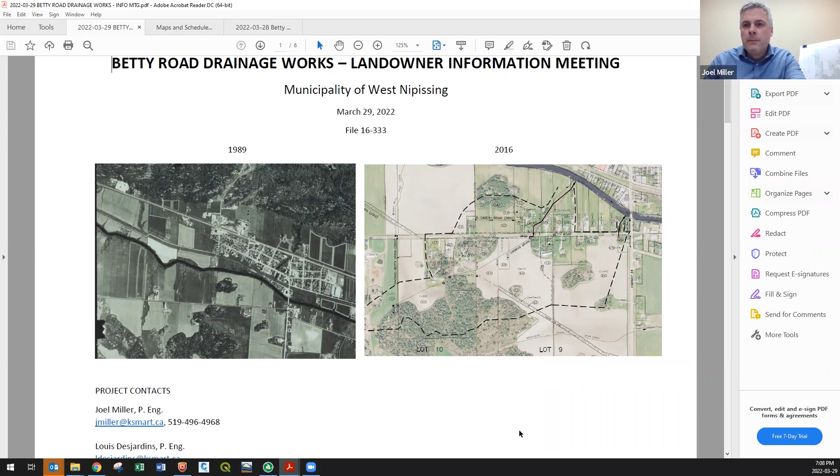On the first screen, and this is a very rudimentary presentation. With these projects and meetings like this, I think the most important thing is to convey information. And so I haven't gone out of my way to make this presentation super glitzy. So if you skipped out on the hockey game to see a glitzy presentation, I apologize, go watch the hockey game.

But in any case, this is kind of a neat comparison of an aerial photograph for Betty Road from 1989.

This, if perhaps you'll be able to see my little mouse hand moving along the route of the Gingras Drain. And there's not as many houses in 1989 as we have today. This is the map that was sent out with the notice for the meeting. So that's more just a point of curiosity. But again, I think it's indicative of a watershed that has experienced some change since some of the original municipal drains under the Drainage Act were installed.

So in any case, what we'll do with our time this evening, I'll, like I say, walk through some of the investigation and the findings that we are bringing to the meeting tonight. I'll be fielding questions if you have any as to the drain design or what our recommendations are. Then I'll walk through assessment calculations.

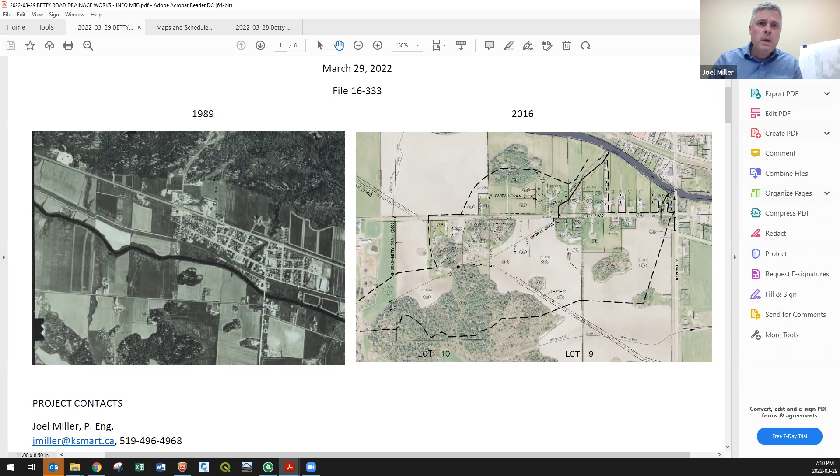And the other thing I'll mention at this stage of the game would be that I'm going to be in the neighborhood tomorrow, certainly for the first part of the day. So if you wish to meet with me on site to talk about the project, talk about what I'm recommending, or any of the items related to the project, you can either send me an email, and again, here's my contact information, jmiller@ksmart.ca, or that's my cell phone, and just send me a text or give me a call later tonight, and we'll set up a time to meet on site tomorrow.

I'll have some availability to do that, because I think it's important that people have the opportunity to talk about the project, because it's your own backyards, it's your lands, it's your pocketbooks, your wallets, and so I want to make sure everyone has a chance, considering the format we're in, to talk about the job with me on site. So that's available as well. So if you need any of the email addresses later in the meeting, just interrupt, and we'll go that route.

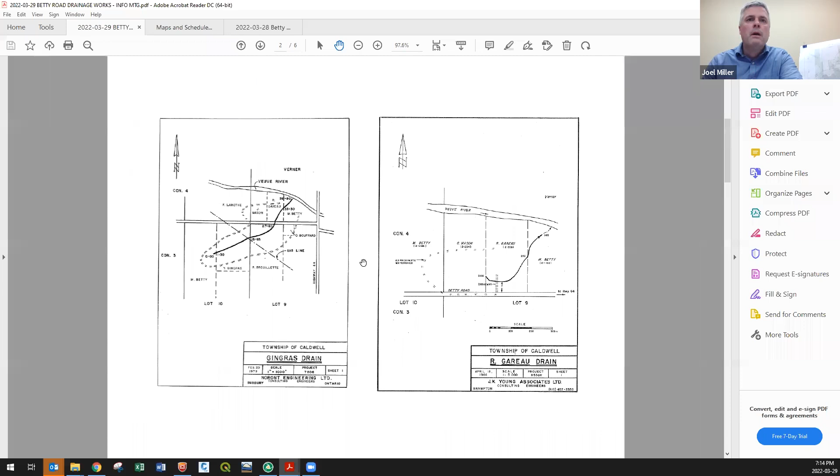So first step in any drainage project is to sort out where the watershed is. So we consulted all the different historic watershed drawings and maps. These are some of the drains that are further to the west. Again, this is the area of our focus. This was the 2002 extension of the R. Gareau drain upstream.

And what you'll see in the map that was sent out in your meeting notice and the map that is going to be in my report, this boundary, as I've shown it in black dashed lines here, represents our best understanding based on our field work, our survey, and contour lines, the actual area and the hectares that get into the two drains in question. So the Gingras drain, the R. Gareau drain, and this new drain, due to the Section 4 petition by the municipality, called the East Drain.

And that's as creative as I can get for a drain name. So if someone would like it named after them, you can send me an email later. But if you choose not to do that, I also understand.

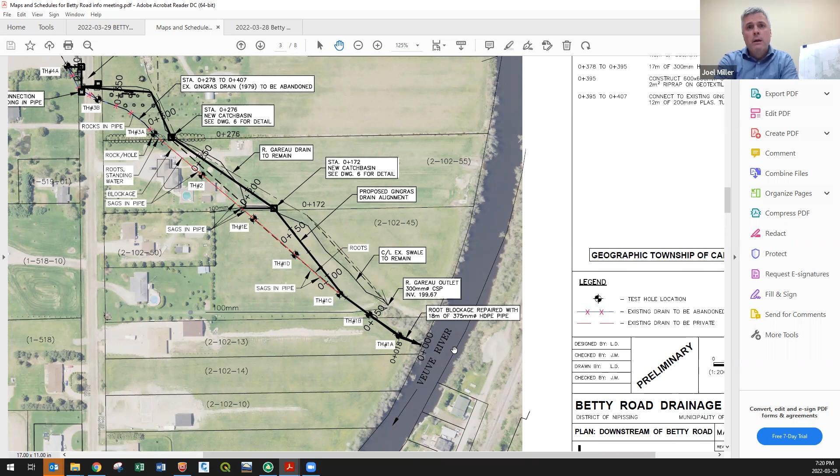And what was done at that time was to not just repair it with the same size pipe, but we went ahead and upsized it a couple of sizes in anticipation that the old pipe probably wouldn't be large enough to start with. So there's a section of 15-inch pipe installed to deal with that blockage a couple of years ago. So that did improve the throughput of the old drain, but it remains a drain that's old, that does have some other issues.

Under the road, we found all sorts of poor connections where different laterals and stubs were brought into the pipe under the road. And most importantly, the holes we dug and the camera work that was done helped us draw this on a map with some aerial photography in the background.

So we can say this is where the drain is, because we start this process with a sketch like this from 1979 with property lines that look like this. And that's kind of a bit of a blank slate. So in any case, that's downstream of the road. These were the test holes we did. Then based on some other feedback we had as far as concerns, drainage issues that were brought to our attention at the first meeting.

Someone's coughing. I hope you're going to be okay. Don't bother taking a test though. I think you're probably going to test negative. It seems like everyone I know is testing negative, even if they cough.

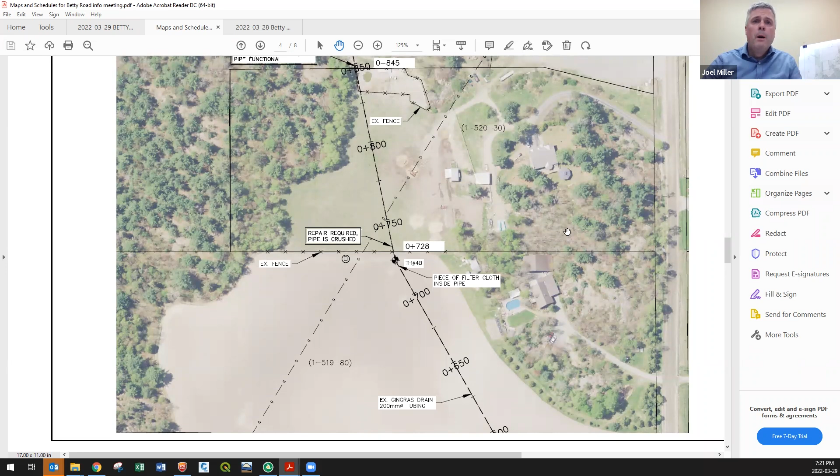But upstream of the road, like I say, it's an 8-inch pipe, and we did a number of test holes here at the Hillborn property, and then further up on this Kevin Sidock and Gingras. Don't know your partner's first name, I apologize. So in any case, we did a couple of test holes there to figure out where's the drain, what's going on, and a few issues that we're going to recommend get fixed. But the capacity of the pipe overall we found to be okay. So that was some of the investigation that we did, and I hope up till now everyone's still awake.

Let me quickly move to this map, because as part of our investigation and based on input we had from folks, there was considerable discussion about whether road ditching had ever been undertaken that transferred water across watershed boundaries. And we did a survey not just of the route of the drain, but also the south ditch of Betty Road and the north ditch of Betty Road, all the way to the top of the hill.

And so certainly the Sidock lane there at address 5603, that is a high point. That's a split point in the south ditch and the north ditch, where water either comes into the drains that we're working on or it goes the other way. And so we did some investigation along those lines.

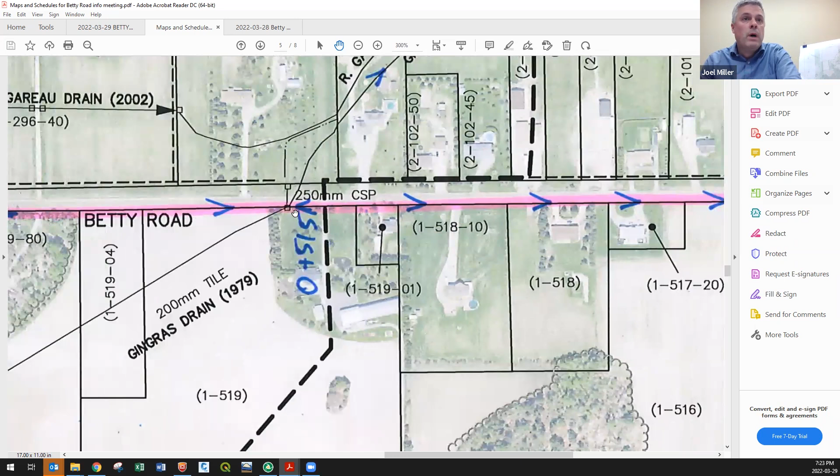And then we also reviewed Briette's laneway, and the survey we did in the south ditch here helped us to definitively say, based on existing conditions, this is where the boundary is. Water to the east of his laneway goes east, and to the west goes into the catch basin and then down the Gingras drain. So that was another piece of our investigation. These are some notes that I made along those lines.

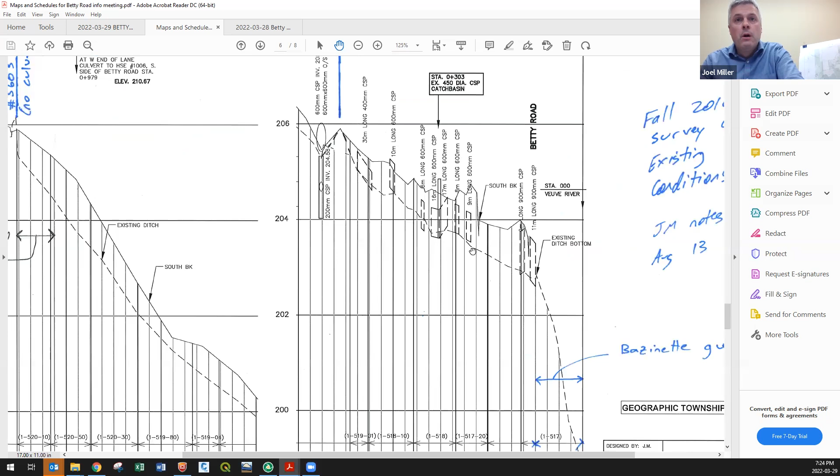And if there's further questions about those, I can talk about them in detail, but this would have been a profile we created of the ditch on the south side of the road. So 0+00 here, beginning at the river, and then we come up the gully to the road, and we proceed west, shooting lots of lane culverts, all of which have slightly different elevations, grades, and some sizings.

And then here at the peak is Briette's laneway, and just to the west of that is where it dips down, and we have the road culvert, and then further. And then we go from this profile to this one, and we continue west up the hill to Sidock's laneway, and that becomes the split point for the watershed boundary, with the water to the west going into a different drain. And if you had really good eyesight, you just saw the assessment schedules.

But we'll bring those up and discuss them in detail later. So one of the other questions that was asked of us in our work was, what should we do with this water? And I'm going to see if I have another drawing that I'd like to pull up. But before I do that, I guess I'll back up to this one.

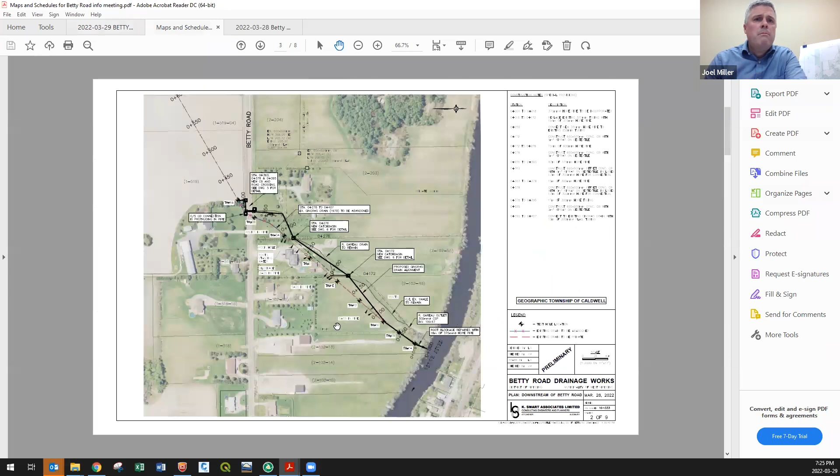So as I mentioned, the existing Gingras drain takes water, subsurface tile water, but then downstream of Betty Road, it also handles surface water. So we're dealing with two different pieces. We have subsurface tile water where you need a deep pipe and it runs a fair bit depending on soil moisture conditions and these kinds of things. But then a surface pipe that responds to spring melt and heavy rain events that wouldn't fit in a subsurface tile drain.

So we knew without question that the Gingras drain needed to be replaced in any case from the road down to the river. So then the question just becomes, what makes sense in terms of handling the surface flows, those larger volume events? Do we continue to have them run along the swales to the river? It's not going to be reasonable to upsize pipes to handle all the surface flow down to the river, or do we look into taking that water east? And that was a suggestion that was made by a number of folks, and we were asked to look into that.

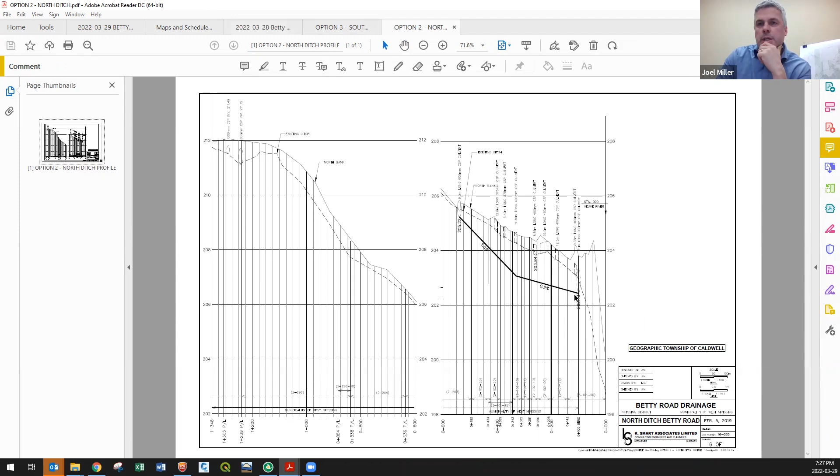So I have a couple of other drawings that I would like to share. So again, these are drawings that show from the Gingras drain crossing on Betty Road to the east over towards the gully. We looked into what kind of grade was available, what was the capacity of the culverts that were there, what would it take to run major surface flows to the east. Never mind whether it's a great idea, but let's just look at it from a cost standpoint. And if the numbers make sense cost-wise, then maybe we can solve some of the technical engineering tricks.

So that was the north ditch profile. This is the south ditch profile. So again, all kinds of fall going that way. But what we found was that every single one of these lane culverts would need to be replaced. Even some of the newer vintage ones wouldn't necessarily match the design grade that would be required. So you had adequate size for standard roadside culverts, but if we brought that surface water in the direction being considered, we weren't just handling the water that everybody's used to seeing. We'd be diverting that upper watershed a new direction in that south ditch or in that north ditch. So those culvert sizes that you see today wouldn't necessarily apply.

So we looked into the hydrology, the sizing that would be required. And then we did some preliminary costing. And what we found is shown on this drawing. And I'm hoping that you can at least see the colors, because I'm really proud of these colors. If we were to just run the surface flow, we still have to spend money to take the tile water north, unless we're going to put in a $435,000 storm drain that's deep enough for the tile water as well as the major surface flows.

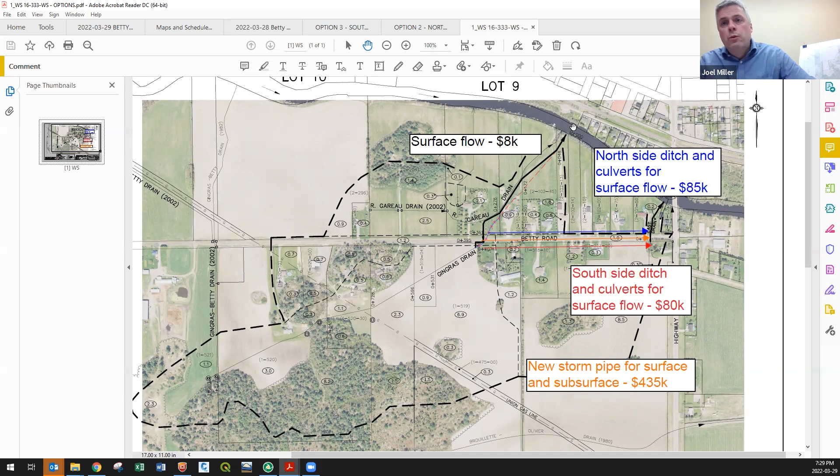And so you can see, again, when you see these numbers of 80 or 85, and even 8,000, you got to remember these don't include the cost that's involved to deal with the tile water, the historic Gingras drain flows that are coming and will keep coming in this direction. And so the overall cost of the work is higher than the numbers you see here. But this was an exercise we went through just to compare the relative cost between options to deal with surface flow, major event flow.

Okay, so if there are questions about that later, I can talk about them, but again, that was based on the survey, the calculations we did. And so it's quite obvious that we needed to continue looking, in terms of our recommendations, at just providing improved conveyance downstream of the road, so there's less surface water that's problematic for the landowners in this part of the watershed.

So I will, I think before I get into our recommended work, I'm going to pause. So next I'm going to talk about what we propose and what we want to do. But before I do that, up till now, I've kind of just been talking about what we found, our existing condition findings, and drainage patterns in the watershed, these kinds of things. Are there any questions for the folks that are on the Zoom call that are burning that you'd like to ask right now?

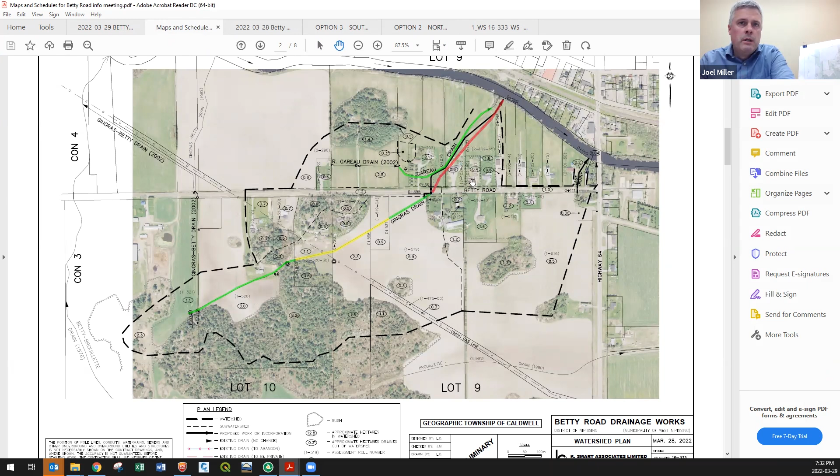So I'm going to now bring up our drawing set and try to walk through what we propose for the work. I've talked fairly extensively about the Gingras drain and this watershed and the watershed splits, but it would also involve the proposed work for addressing the gully stability issue at the east end of the road and the catchment that drains to what we were calling the east drain. So I'll now go into a bit of discussion on what our recommendations are. So if I can now get to our drawing set, this is the map you've all seen.

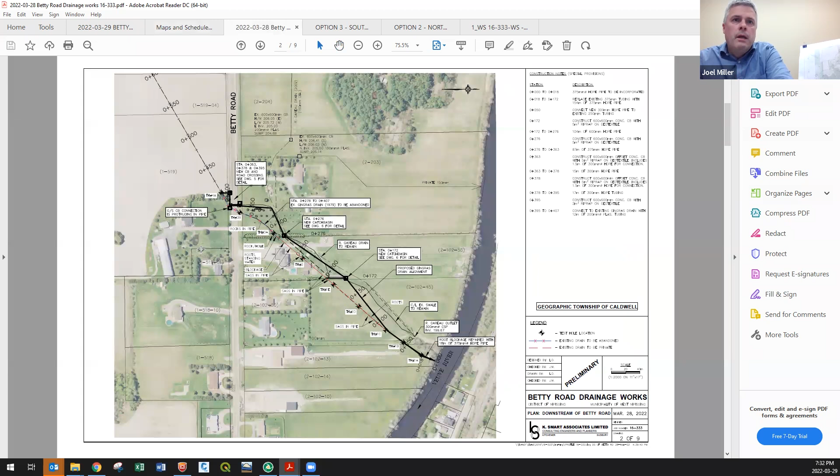What we recommend, I hope no one's getting motion sickness, is that the existing pipe from the road, from Briette's lawn, where it cuts diagonally between the pine trees, under the road, diagonally across Renee's yard, and then Peter's, Joey's, and Andre's, yes. Thank you for that. I apologize, a lot of names here. We are recommending that pipe go from being a 10-inch piece of bag tubing to 12-inch or 300 millimeter diameter smooth wall pipe. So that may seem like not a huge change. We're going from a 10-inch pipe to a 12-inch pipe.

The reality is a couple of things. First of all, the 12-inch pipe does bring the drainage standard for this drain up to current practice. So that puts the whole drain into the green. Okay, so that's the first thing. The other comment I'll make is that the capacity of a 10-inch tubing versus this 12-inch smooth wall pipe, the 12-inch actually gives you over 2 times more capacity than the existing pipe. So we're more than doubling the capacity downstream of just the Gingras drain. We're bringing it up to current standards, and in doing so, we're more than doubling its capacity. So that's encouraging. I think that's significant.

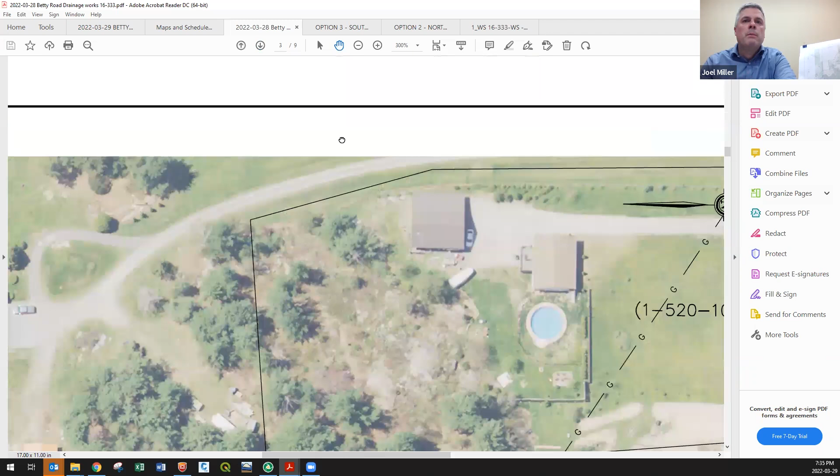So here's a picture of the connection we'll make at Briette's Field to the existing tile. We'll abandon the portion that runs diagonally through the lawn and the trees due to root concerns over time. Square it off, have a catch basin here to take south ditch flow coming from the west, have another catch basin again in the low ground to replace the existing catch basin.

And then going under the road and then downstream of the road, we're going to follow a path that is considerably closer to the low run, the swale that's on Renee's yard there. And then this section of the pipe will be abandoned. So it won't have any more status under the Drainage Act. And the idea here too would be that we're consolidating the location of the drain.

So we already have the R. Gareau drain coming from the west, where my hand is. We have the overflow swale from the road culvert. So the road culvert will be replaced here as well. And then we'll have new catch basins on each side. So the overflow swale, along with the drain pipes, are now all in a tighter corridor as opposed to kind of being spread out. At the time a lot of these drains were built, it was 100% farmland.

So it made sense to go in a straight line or maybe not take the path that we're recommending. But at this stage in the history of the watershed, it's best if we can bring these drain corridors as tight as we can, just to improve usability of the property for the landowners. So as we get to the property line with Renee and Peter, we set a catch basin here, and then we continue to cross with the 300 pipe, another catch basin with the property line with Joey and Peter here.

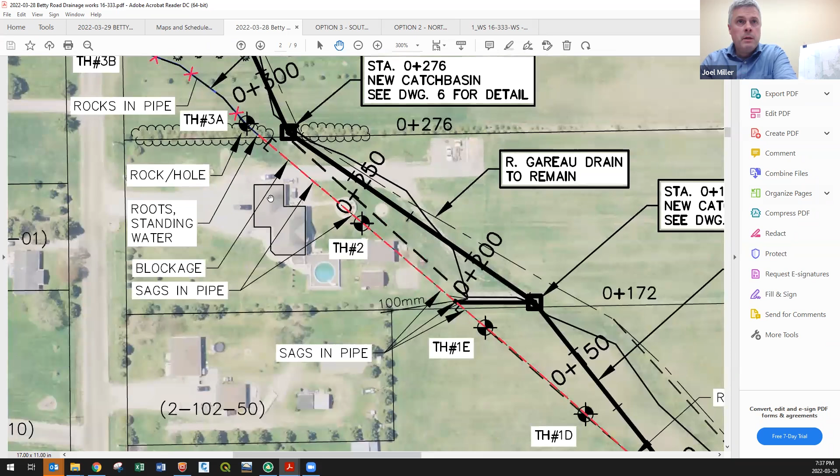And then here again is a significant revision in the alignment really across all three properties, but bringing the new 12-inch pipe much closer to the existing swale and the existing R. Gareau drain. So we're not sort of monopolizing such a wide footprint of this private land using it for drainage. We're creating a tighter drain corridor to improve usability of the land, and it doesn't change the design or add cost to the project to do so.

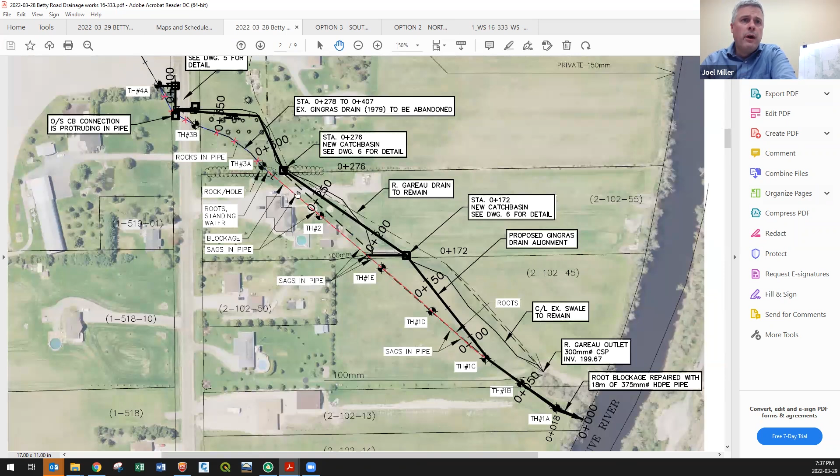And then near the downstream end of Joy's property and across to Andre's, we'll follow the existing drain alignment, and that's what's shown here. So that is the proposed pipe drain downstream of the road. Catch basins, a new 12-inch pipe. We hook in. So the old drain that's there will remain in place. Landowners have asked for that. I'll be speaking with Renee over the coming days to find out what his wishes are on this one.

And Sean, you and I will have a detailed conversation as to what we do with this older pipe under the road. My hunch is it should probably come out since we'll be digging up the road anyway, or it'll be blocked. And then I've spoken with Peter, and this drain will become private. It'll be his to look after in the future for maintenance, this older pipe, but he wishes for it to remain there. It'll be tied in at the property lines.

And the other thing we'll be doing is an interconnection between the R. Gareau drain and the new 12-inch. And the new 12-inch is going to be deeper than the R. Gareau drain. So it will be the preferred location for flow. However, if there's ever an event where one of the two pipes has extra capacity, then they both can work in concert once we've provided an interconnection here.

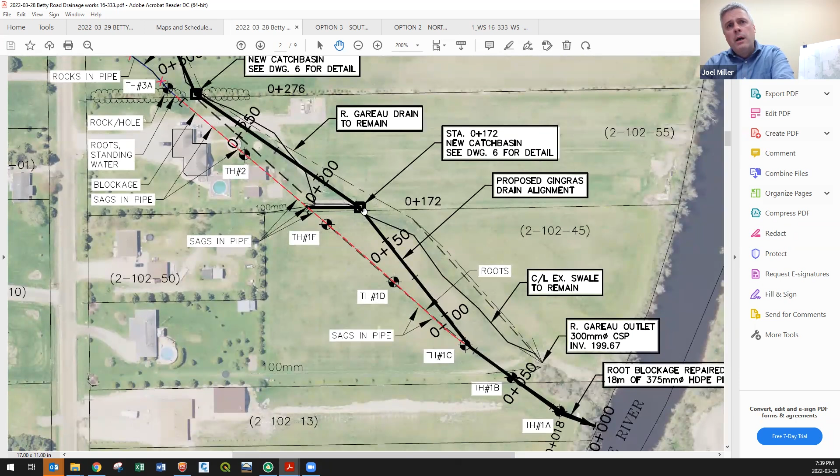And that won't have any adverse upstream effect, because if both are full, then the surface spillover location will remain this path along the drain across Peter's lawn. That's what he and I discussed. And then the same story applies at this property line. We'll tie in the old drain, and if the pipes are at full capacity, if we're experiencing a significant rain event, then there would be an opportunity for the excess water to boil out of the catch basin and take the valley, the swale, on downstream.

What would be that event? So John Lindley is here with me in our Sudbury office, and his question related to the design storm.

So what we've found in our modeling was that the 12-inch pipe, and I'm gonna need to, thanks a lot, John, asking me a question that I don't have at the tip of my tongue. Yeah, you better apologize.

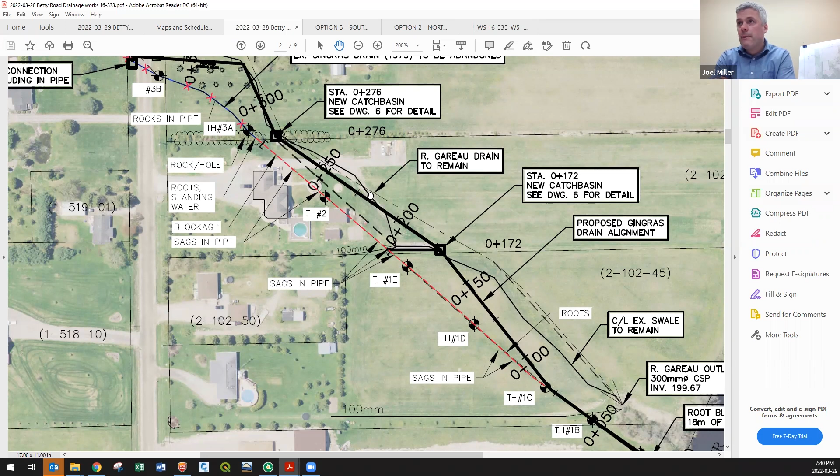So what we're finding with just the 300 is roughly the 2-year event can be handled in the pipe, and anything above that would go overland if it's a textbook design storm, synthetic design storm. But I think it's significant to revisit the fact that the old 10-inch has been working well for the last couple of years, and hasn't even come close to overflowing. And we'll put in a pipe with an interconnection that's more than twice the capacity of what's there. So that's the recommendation as far as sizing is concerned.

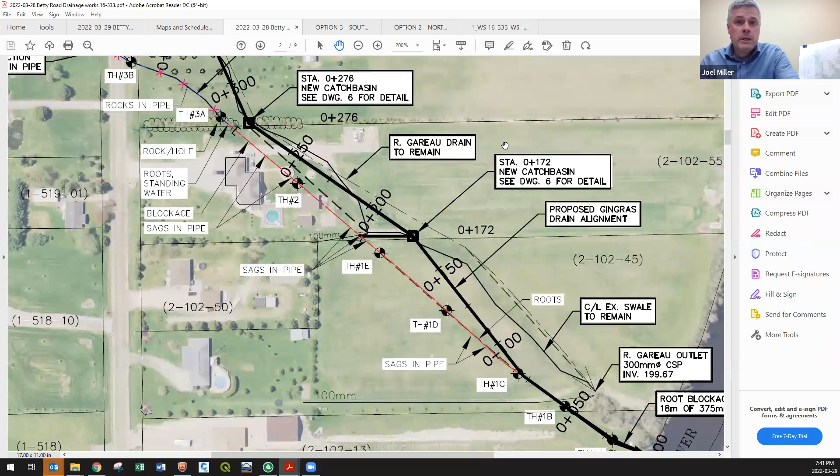So will there be surface water during extreme events? Yes, and that remains the case unless folks have money to spend and want to spend it on pipes. Then that's what my recommendation is. It certainly is a massive improvement over the current situation, and it brings it into current standard drain design.

So that's probably enough excitement downstream of the road. I will then just hop to this next drawing. That'll be part of the drawing set that just illustrates a couple of point repairs that we recommend doing based on our camera work when we did our test holes.

We did find that there were some issues with the existing drain near the fence line here. There's a blind inlet to the south, sort of a Werner style catch basin with a bunch of rocks, soak away hole with a tile connection to the drain in this area. So we found a few items in the pipe that slow it down. So just a short amount of pipe replacement is going to be needed to bring that back to its full

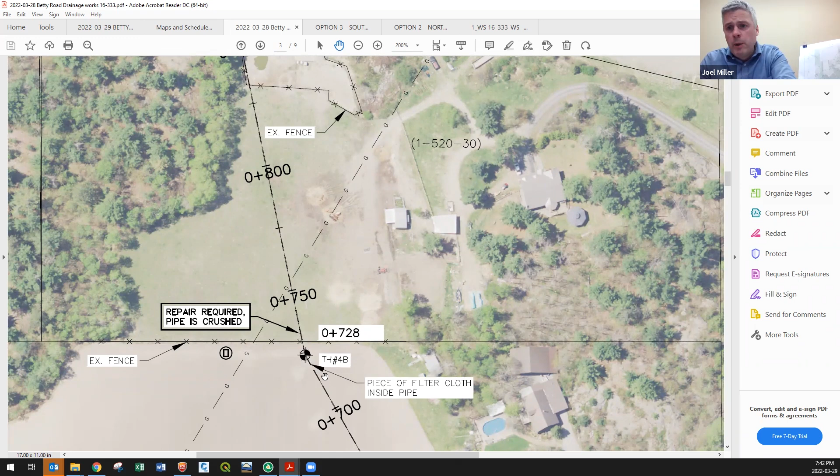function. As well as some rocks and some issues with the pipe right around here. So just local amounts of point repairs there, not wholesale pipe replacement. So that work is part of the proposed project as well, and that's in some ways sort of maintenance type work, just to bring that up to function.

And then again, this is the road crossing on the Gingras drain. So catch basins on both sides, offset to help reduce issues with freezing during the winter. And Sean, you and I can fine tune some of those details as we need to before we finalize the design. Drawing wise, it won't affect costs necessarily.

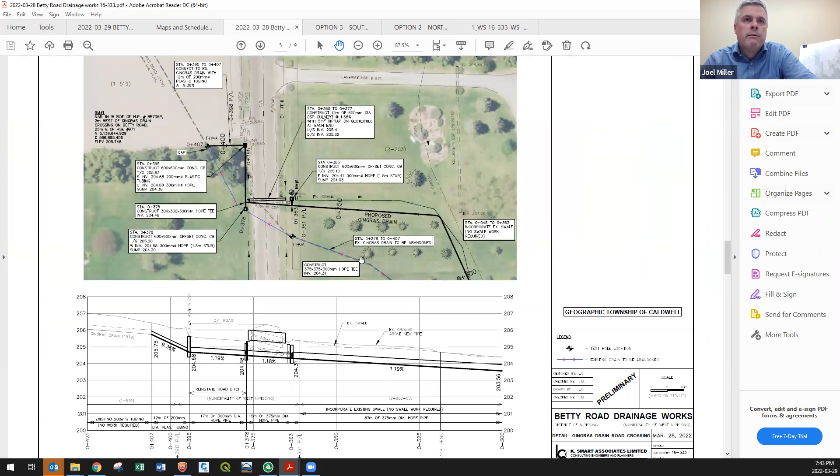And then replace the road culvert pipe while we have the road dug up. It's pretty old vintage pipe. It's crushed on one end. Still works, but it ought to be replaced while we've dug a big hole here. Okay, so that's recommended work on the Gingras drain. I'm just going to open it up for questions on that before I move on to talk about what we recommend for the east drain. So any questions?

Hello? Yes. I was just wondering, before, the west drain, which is the Gingras drain, okay, that took all of the land and all of the issues that were in or on Betty Road, but now that drain is compromised at all on the north side. What changed for the drain not to be able to take what goes downstream to the west on Betty Road?

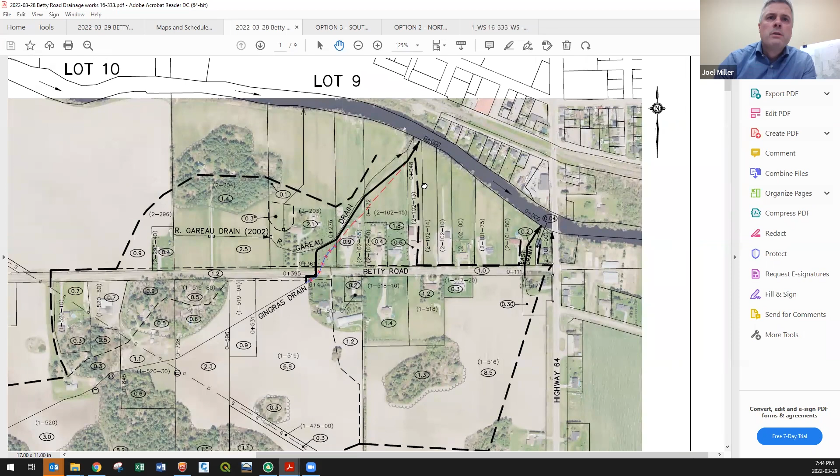Okay, yeah, that's a good question, and I'm not 100% sure who's asking it. Can I ask who was posing that question? Yes, it was Brad Master. Brad. Okay. Hi, Brad. I don't know that we've met yet. It's nice to meet you. No, that's a good question. So

What brought some of the drainage concerns to the fore at the beginning of this project, quite obviously, was a significant root blockage down near the outlet of this tile, and that's been repaired. So that was a considerable source of some of the aggravation and flooding issues and slow drainage that were observed a few years ago. Okay.

So that was just sort of a natural issue, if you will, right? Pipes need maintenance. We have a drain that's 45 years old, plus or minus. So that was one of the things. So then the other question you asked is whether or not there have been other recent changes downstream of Betty Road that have compromised the pipe that's there. And based on what we cameraed, I'd say the answer is no.

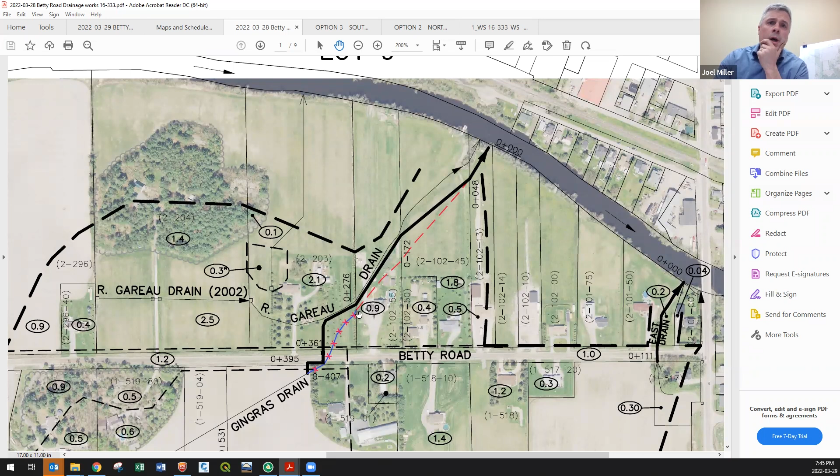We saw some sags in the pipe, which is not an uncommon thing related to construction. Sometimes grade isn't perfect. So we saw some sags in the pipe. There was some monkey business going on here at the property line, and I'm not 100% sure. There was some filter cloth. We thought for a while it might have been a dead animal. So there was a partial obstruction here as well at the property line.

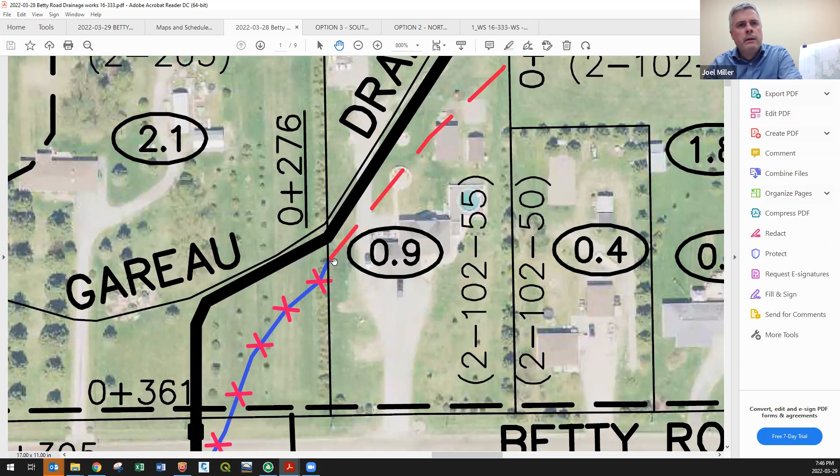In terms of conveyance, the main issue, and then there are issues under the road with the existing tile that we saw in the camera footage. So from a conveyance standpoint, those were concerns we've had. And then there were, like I say, some of the anomalies in terms of sags in the grade, little bellies in the pipe, and that sort of thing.

And then the other item that required some attention, and it has been rectified. I don't know if it happened before we started our work or around the time we started our investigation or during it, but Peter's laneway that was constructed here had a couple of different elevation levels based on the phasing of construction. And we have surveyed that, and in its current state, it's paved at the moment. In its current elevation, it is as flat across his laneway as the elevation of the swale and the overflow route at the property line.

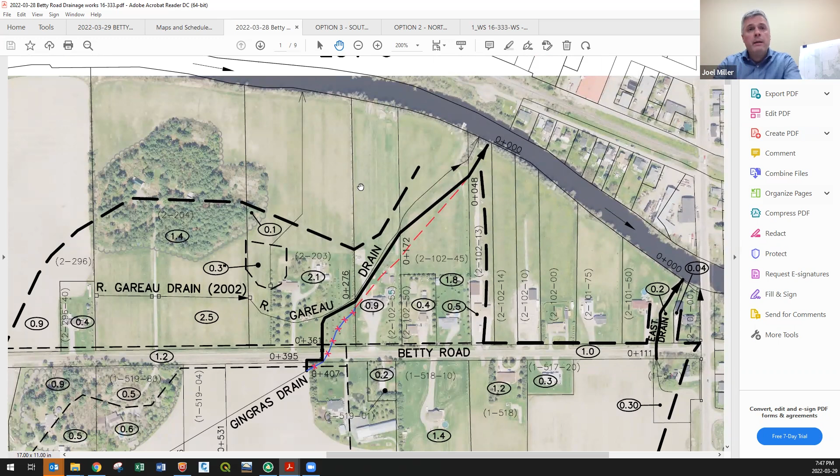So there were, at one point in time, some questions as to the flow capacity. I think it may have been a couple of things going on at once. You had blockages in the old pipe, and then you also had some phasing in terms of construction here that has been brought to completion with a driveway elevation now that's lower than the swale elevation. So Brad, I don't know if I've 100% answered your question, but that's my understanding.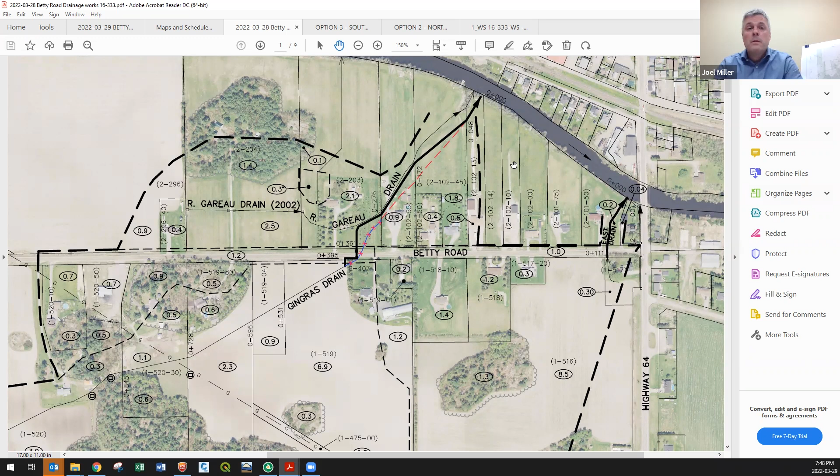If I can, if the road drain was functioning before, and now because it's not functioning as well, or there are issues, then does that not divert water down Betty Road to the other drain? Yeah, that's a good question. And so the answer is no, it doesn't. So when the Gingras drain was not working, none of the troublesome water went to the east, because this is a high point. And that was something we illustrated here on our profile, okay?

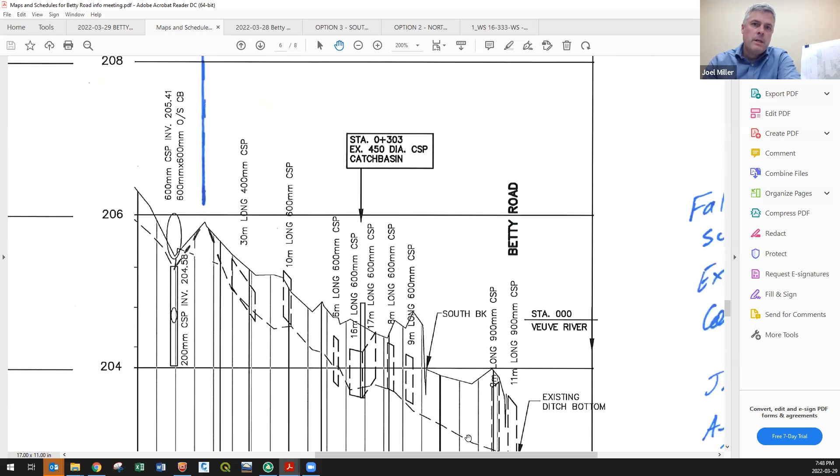So on this profile, this is the road culvert. And unless Briette's laneway ever overtopped, and my understanding is that it never did, water never went east over the hump of his laneway with no culvert into the south ditch further towards your land, which is these two culverts here. You have a pair of 24-inch pipes. So these would be yours right here, Brad. So there was no time when the drain function was substandard where water came to the east. Does that answer your question?

Yes, I guess, but just the properties, including mine next door, last summer they came in and did extensive repairs to my neighbors, and they did the repairs, I guess, before I even moved in, before 2019, to my property, and all of this was done without, if I understand correctly, a plan, an altered existing drain plan. Is that correct?

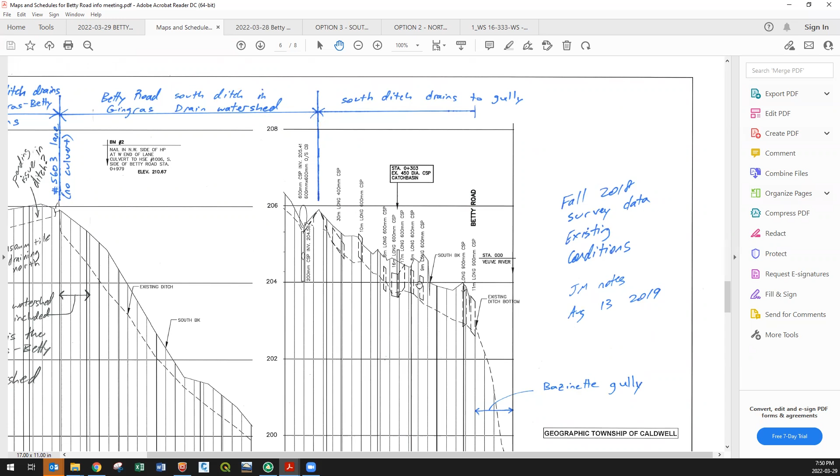It sounds to me like your culverts were installed or replaced and other culverts were installed or replaced as would be the normal custom for lane culverts along a road. They doubled in size or tripled in size on our side of the road, on the south side versus the north side. Almost all the culverts or drainage issue for the land is level or very little ditching done in front of those.

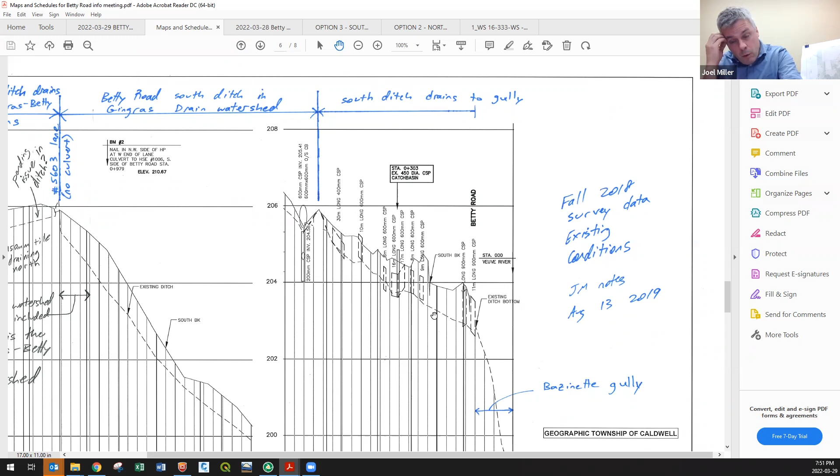Okay, yeah, I'm not 100% familiar with that. I was chatting with Joey. He filled me in on a few of the lane culverts that have been replaced. I believe last summer there were a couple that were replaced, one of the long ones that has a catch basin here. So it would not have been a requirement for any of these lane culvert replacements to adhere to my drainage scheme or the Gingras drain runoff demand, because historically the Gingras drain all crossed the road over at Briette's property through the road culvert.

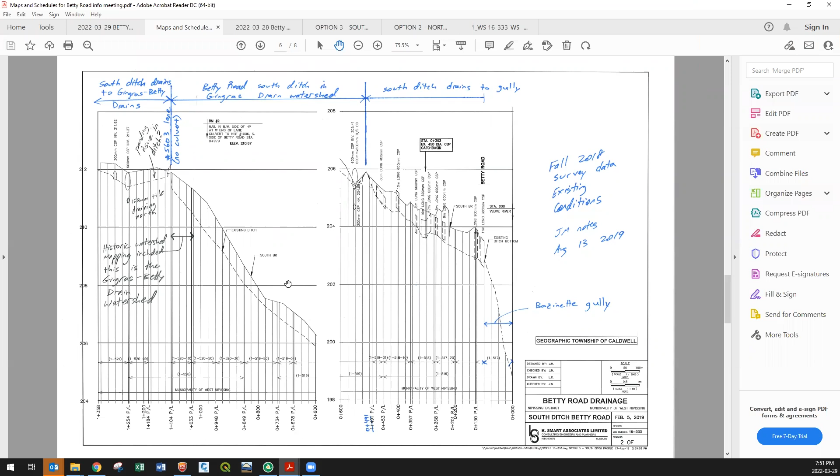Yes. But I guess all I'm saying is that now because that drain isn't working as well, the water's diverted to the east more so than it ever was before. And that was the reason that they had to put in 24-inch drains in front of my house in order to take the additional water flow, which wasn't an issue before.

Well, I have not been informed that there's ever been an overtopping of the watershed break right here at this laneway, where water ponded to such a depth in this yard that it then overtopped and went cruising to the east. So the sizes that were chosen for those culverts would have been outside of our analysis as it relates to conveyance of drainage from the upstream Gingras drain watershed, for sure. I think you're asking a good question, but that's my understanding.

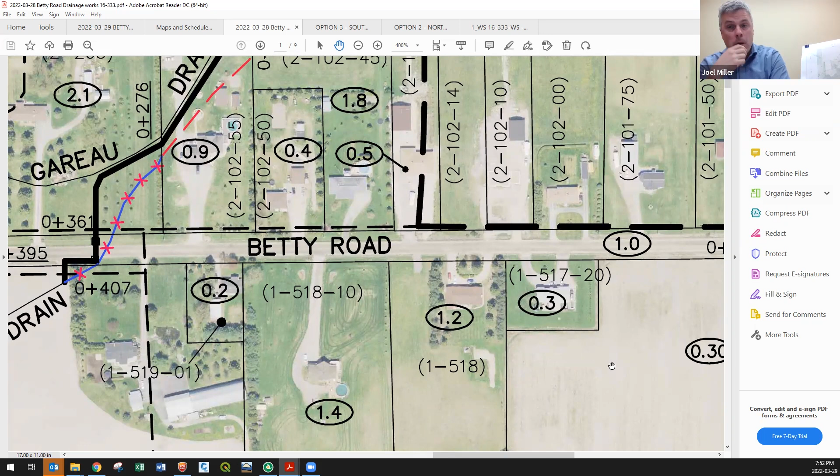So if things were changed, then there's a significant cost that's going to be downloaded to the north or south side of Betty Road.

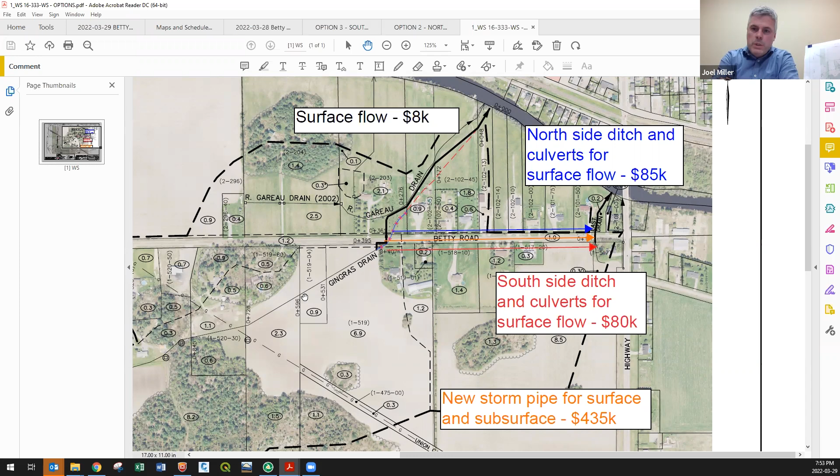Absolutely. And you're 100% right. And that's why our recommendation is not to do that. That's why when I put this options map up here, I was looking at surface flow, because there were folks asking the question, should we run the water to the east? So we looked at it, we surveyed the culverts, we said, what theoretical culvert size are we going to need to meet a minimum standard for lane culverts to take that upper watershed, which is these lands here, and instead of taking the natural path historically, we drag it east.

Our analysis was that's not a good idea. It's not the way it's been done. It's not the way any of the watersheds historically drew the boundary. Historically, and even going back to 1979, I don't agree 100% with this line here, but the point is that historically the path for this upper Gingras drain watershed was always to cross the road at Briette's and go to the river.

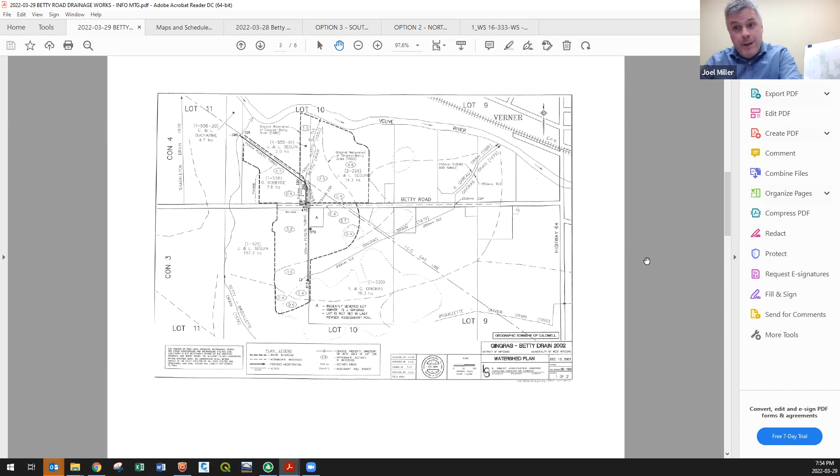So definitely, I agree with you. There would be cost offloaded to the folks. You'd have larger culverts, you'd have more flow, and you'd be participating more in the cost for the Gingras drain if we brought the water that way. So it didn't make any sense from a dollars and cents standpoint. So we're not recommending that.

So the reason that these lands are in, and I apologize if I'm hopping around too much here, the reason these lands are highlighted orange. One of the things I'm going to explain here is that I have a major outer catchment boundary, and that's this bold dashed line. And then we have little subcatchments within the big catchment where some water goes one way, some goes another way. And we split the drain into sections, and certain sections of the drain serve particular subcatchments.

And so in any case, we have a subcatchment line that crosses Betty Road at Briette's Lane. And based on our survey, based on my understanding, based on the design we're doing for capacity and calculations and flow, this is a boundary that we recommend keeping as is. The status quo should be maintained. No lane culvert here. Water goes in two different directions at that point. It's a split point. So thanks for that.

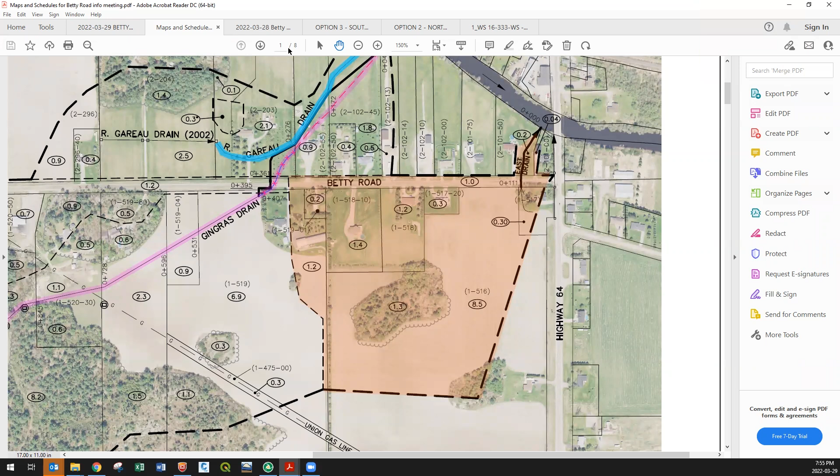Wasn't the attempt to fix this issue digging the south drains out more in front of my house in Bouffard's, and so that cost was done, because I guess what I'm trying to understand is how is that cost okay then, and the municipality covers it, but now we're going to have to cover the cost of redoing a great portion of it.

Yeah, no, that's a good question. So maybe Sean, if you're on the call, if you're familiar with some of the road ditching that was done in here. My guess would be the road ditching was done to improve the function of the road ditch just for the existing catchment that it serves. So that's kind of standard road ditch maintenance work. Maybe people were concerned that the ditch needed a clean out or needed some additional capacity. And so for this existing catchment, the municipality has always been under the understanding that these historic watershed divides are important and are good to maintain. And so I believe that would have just been standard road ditching work.

Yeah, you're absolutely correct, Joel. The work on Betty Road. So we have our capital planning. We always enhance drainage, change culverts, give the road time to settle that year, and then we do granular resurfacing the subsequent year. So that's exactly what happened on Betty Road.

Okay. If I may comment on the sizing of the entrance culverts. I do believe there were bigger culverts flowing into smaller culverts. I'm going back a few years, so I'm going off memory, but there were some capacity issues where the ditches in the spring were at capacity. So some of the culverts were installed at a little bit larger diameter.

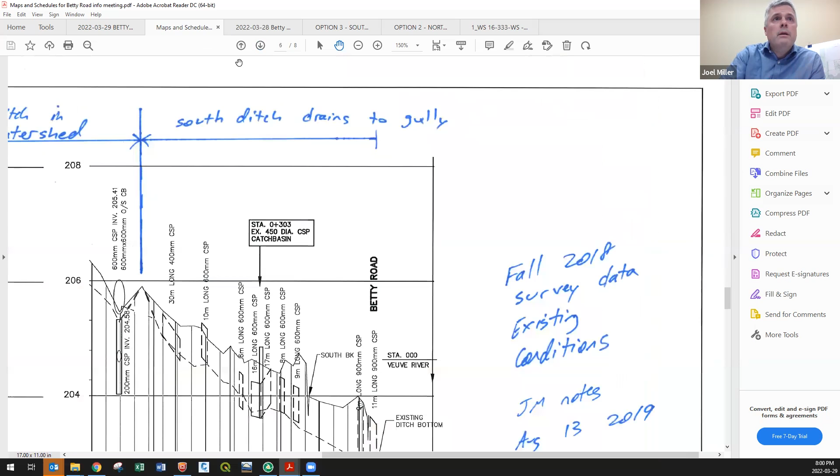But as we took a closer look, and I'm going to get to the proper drawing here, at the gully and the slope stability issues that we found there, what we are recommending for the gully, it takes water from that orange catchment, which adds up to, I believe, around 13 hectares, something like that. Sorry, can I interrupt, Joel? Oh yeah, for sure. Sorry, Brad. Yes.

The issue with the east end of the road, because nobody said it yet, is that there actually was no municipal drain there. Oh, right. So what Joel was trying to say is that the water in that catchment area was always there. The digging of the ditch on the south side didn't increase the amount of water, but it made it go faster. And then it crossed under the road into what you're seeing there as the east drain, which was actually private property. Right. And now we come to the picture that Joel wants to show you about how they intend to rectify the east drain, which is now going to be a municipal drain.

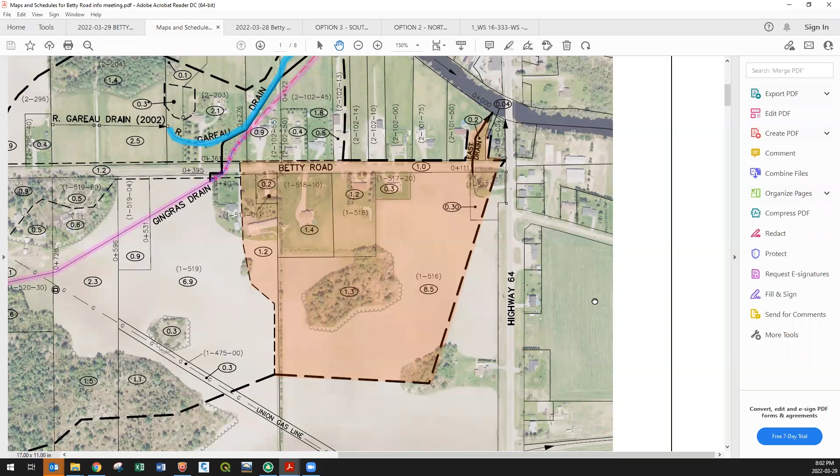Thanks, Diane, for that summary. That's very helpful at this juncture. So we had a gully that was on private land that over the years had changed as gullies do, and it was taking flow from this catchment. So the recommendation that we've put together for this type of a scenario is to put the flow in a pipe, to backfill the gully, not necessarily level full, but to provide, like we always do with a pipe system, a combination of a pipe with an overflow swale for the major event.

And so on the profile, I'll illustrate this. On the left-hand side is Betty Road, an existing 3-foot diameter pipe, corrugated steel. Our proposal is for the municipal drain to extend to the upstream side of the road. So the culvert will be incorporated as part of the drain. No work needed, but it becomes an inlet, a location for water to enter.

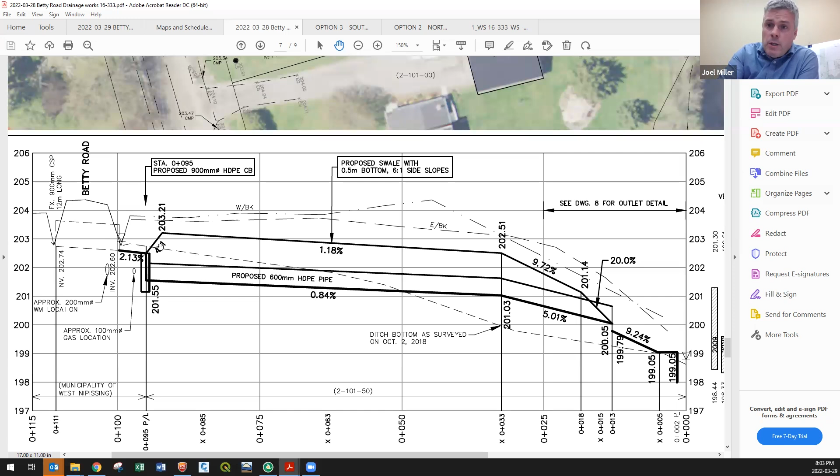And then downstream of the road, we would set a catch basin and then run a 24-inch pipe, not necessarily in the bottom of the gully. We're going to just go in a straight line because I like straight lines. And it makes sense. It's easiest. I don't have straight lines everywhere on these drawings, as any of you would notice, but in this case, from a topographic standpoint, there's no reason to follow the arc of the existing ditch. And we'll put a swale. And the reason you're doing that is because of erosion. And the reason we're doing all of this is related to erosion.

John Lindley's over here in the corner of the room, and I wish you could all see him because he puts his hand up like this and he says, Joel, there's an obvious comment you need to make.

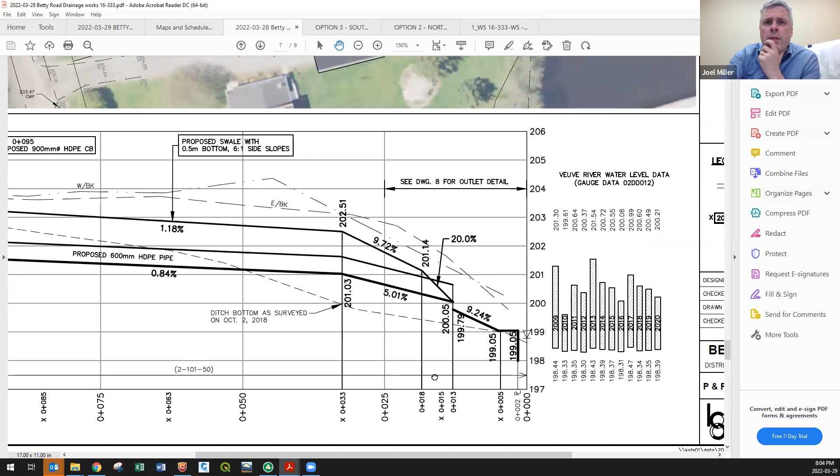So just say it. And we have erosion. I did not include in my presentation pictures necessarily of some of the slope instability, but it's definitely there. And I think one of the things I'm going to mention at this stage, because it helps explain the recommendations in our design, is at the bottom of this profile, we have a little triangle symbol, and that shows the water level on the day we surveyed it. And then this dashed line is the bottom of the gully that we surveyed in late 2018. It happens to be a gauge, a water level gauge on the bridge right there at the highway.

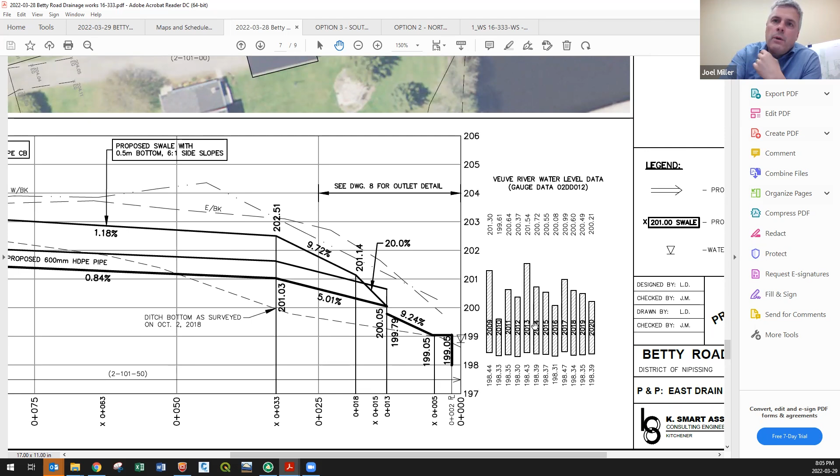And so there are natural fluctuations, as everyone knows, in the river water surface elevation annually. So there's a recorded minimum elevation, a recorded maximum elevation, and then the rest of the time it fluctuates in between. So what this helps us know from a design standpoint is that slope stability issues in this private gully are brought on by two contributing factors. One, obviously, is the flow of water from the upstream lands, from that orange catchment that I showed. But then another contributing reality to this is just the nature of the outlet and its fluctuating water levels in the river backwater.

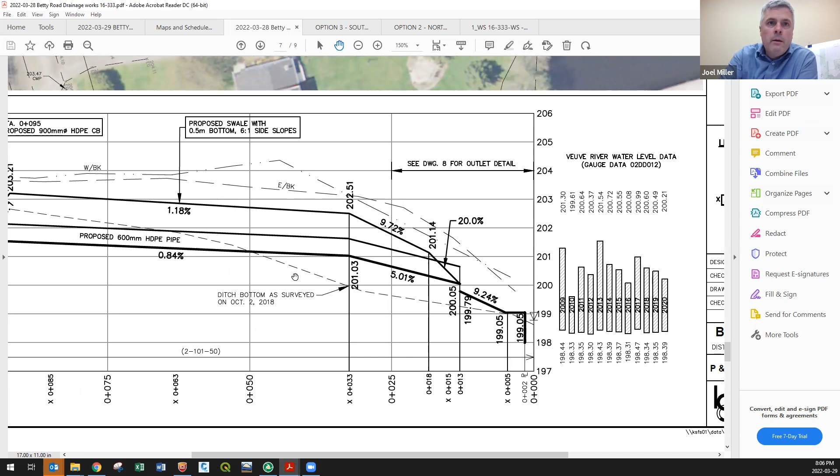So what would happen is if the river is at this elevation on a particular day, if we go to 2018 around the time this project started, you can see in 2018 the high water level was around 200.5. So that basically would show backwater partway up the gully, not moving fast necessarily in those conditions because the ditch is full. But the point is that the river fluctuates. And so in our design, we can't just dump a pipe at a random location and then not protect the outlet, because these slopes will be subject to the saturation that occurs when the river water level comes up and down. And as varved clay goes, that weakens its cohesiveness.

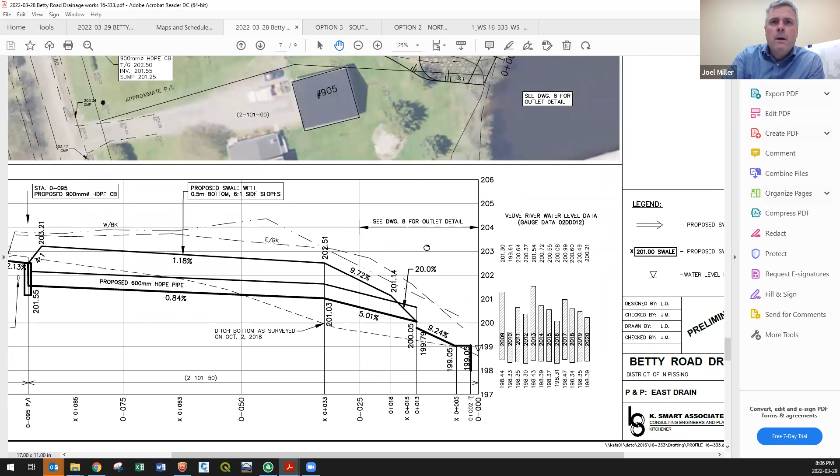And so there's a need to protect the outlet with a considerable amount of riprap that we've done at other municipal drain outlets in river situations like this. And so there's going to be some pretty big stone near the outlet, over a couple of tons each. We need a big anchor for the riprap outlet structure using toe stones between 2 and 3 feet in diameter, a couple of tons. And so that will be how the whole bottom end of the system holds in place as the river comes up and down.

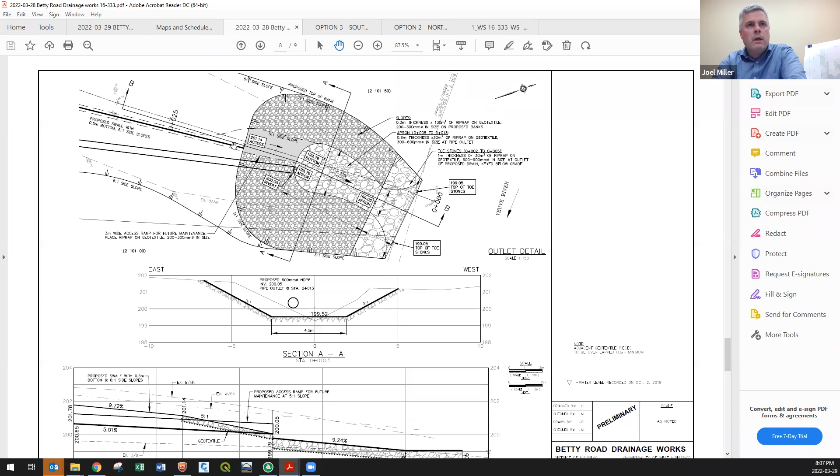And then we would armor more or less the outlet of the pipe here, which is in from the river. So we're not sticking a pipe out into the river cross section. In this case, we are protecting the outlet inland from the main flow of the river with this riprap outlet. And the concept then would be with the pipe taking a straight path, the new center line of the swale more or less parallel to the pipe, and then near the outlet a ramp that would allow equipment to access the outlet and do future maintenance if needed.

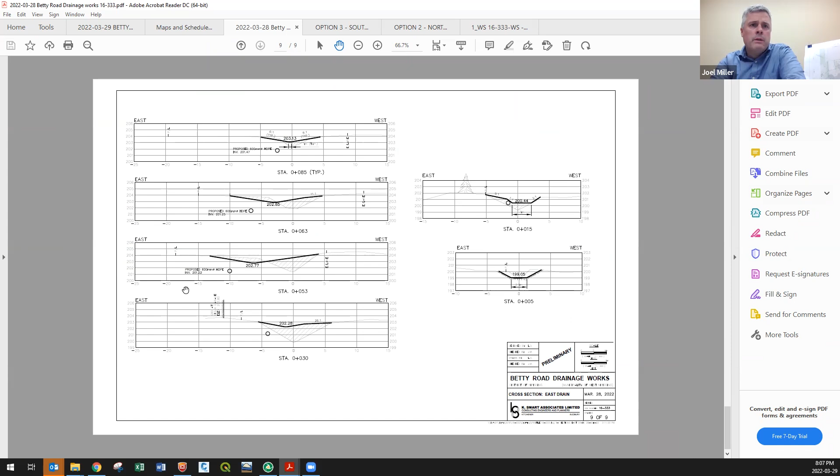And then, like I say, the cross section of the ravine, if you're really into cross sections, then you're my friend. If you're not, you're still my friend. But these cross sections would illustrate, for example, the situation we have right now at the lane for Linda and Dennis. So this particular cross section is really exciting. It's taken right here at Station 53. So this is a place where their lane, where they park, is quite close to the top of the slope of the gully.

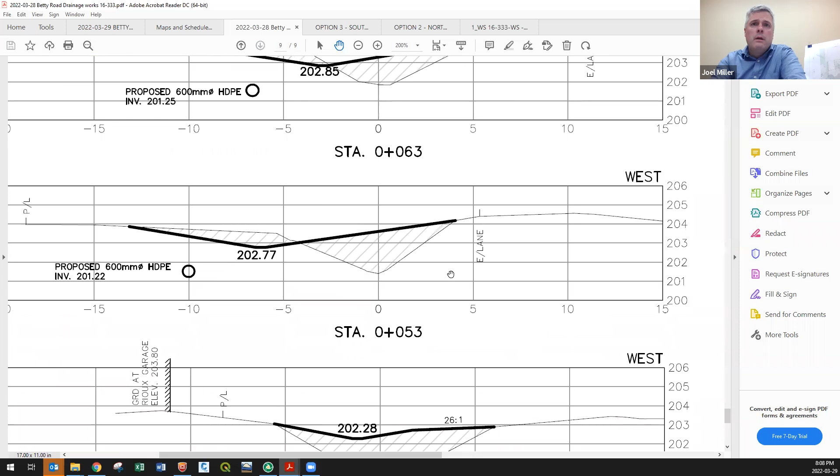And so our recommendation would be that the gully be filled, and then where we have a steep and unstable slope close to where they're parking, there would just be lawn as an overflow swale with an access route for future maintenance. And then the pipe just gets buried in the native material further to the east. So that's the overall design concept there. That pipe design can handle the 50-year storm. So again, it's not really a case where we're over designing necessarily. This is the type of outlet infrastructure that needs to just work, carry the water away, and not require tweaking or babysitting down the road. And so that's the recommendation we have for that part of the system.

So the East Drain, unless someone gives me a more creative name, that's what we intend to call it. So any questions on the East Drain?

I don't think anybody wants their name on it. Okay. Then East Drain it will stay. Linda, I leave that one to you, but I don't think so. No, no, no.

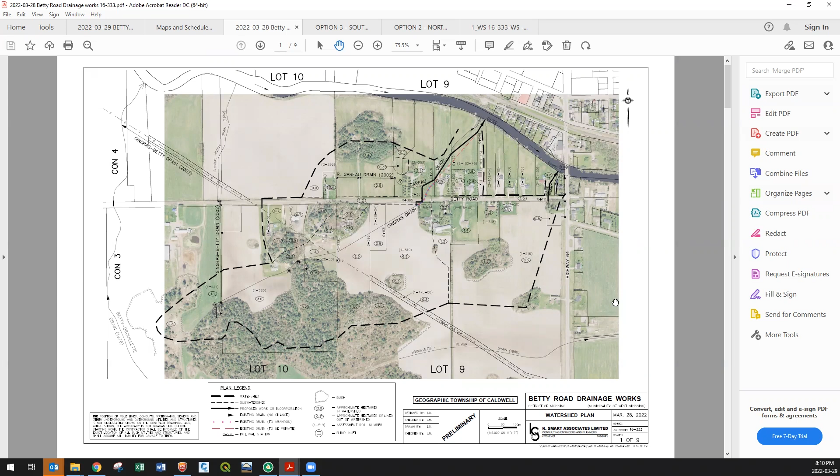So the issue with the east drain, again, is because the homes are so close, the buildings are so close to where that gully is. If the water continues to flow at the speed it's flowing into that drain, it is going to put homes and buildings at risk. And so for water to continue to be piped under the road and onto that property, something has to be done to prevent further collapse.

Yeah. And then there's the real important, significant piece to the story too, which is that it's a private gully now. And so there's recognition, there's a priority for the municipality in this particular case to ensure that there's good conveyance for drainage, not just from the road, but also from all the lands that contribute flow into this system.

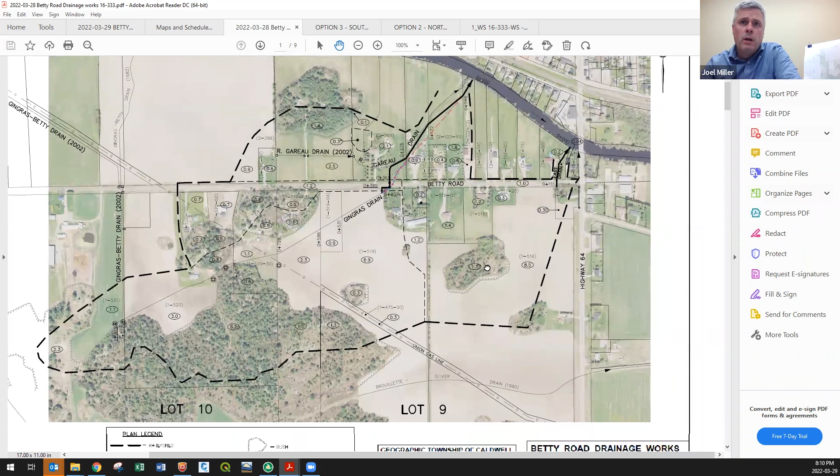So, in terms of relative flow contributions, these little ovals on our map represent the affected hectares, and we round things off to the nearest tenth of a hectare in this kind of large scale land drainage work that we do. So these are the contributing areas that flow to that gully. So the road represents a fairly small slice of the actual runoff contribution, but in any case, that's part of the outlet assessment that we'll talk more about later.

Okay, are there any more questions on the design? I want to move to the project cost and assessments, and then we'll try to wrap things up.

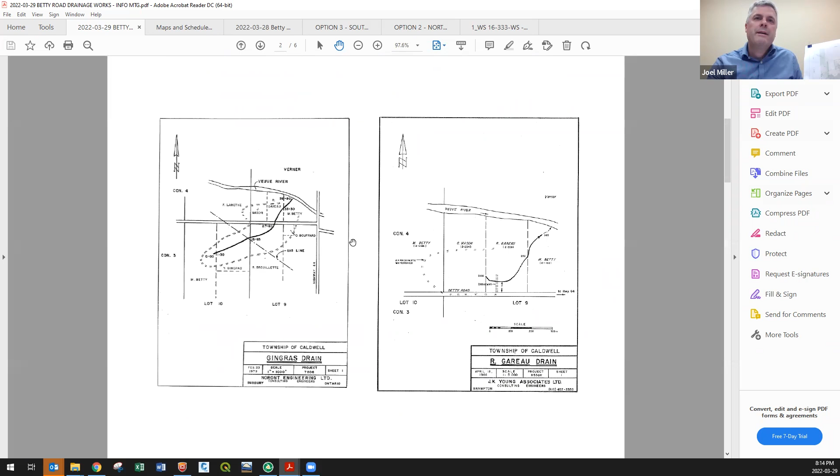What I'd like to do now is show this slide that summarizes the overall project cost. Okay, so there will be detailed cost information in my report. I'll break out the quantities of pipe, the quantities of catch basins, how much for seeding, how much for allowances, all the details of the project cost will be in my report. But where we sit today, based on the work we've discussed, we're estimating a $324,000 project. Okay.

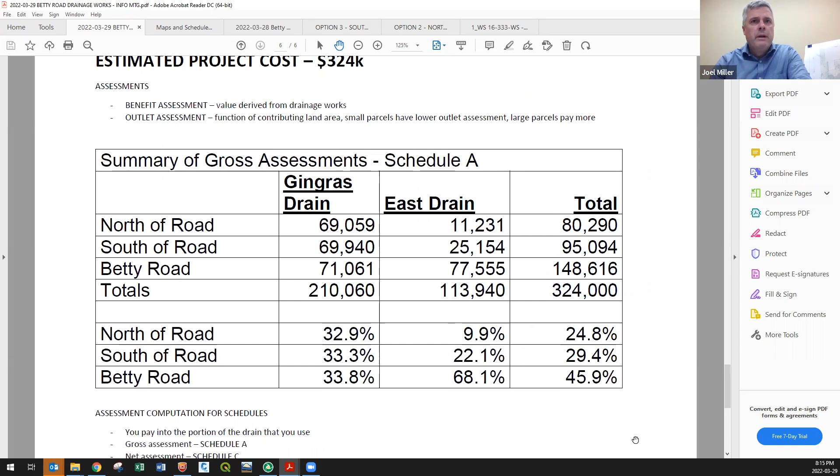On the east drain, assessments are shown in this way. North of the road owing 11 grand. South of the road, due to that outlet assessment, I'll talk more about that in a minute, 25,000, and the road authority paying close to 80. So that's where the total project cost at a high level lands. Now, as I've kind of alluded to, your assessments are a function of two things.

Does the drainage works bring value to your property? Does the work we're proposing to do benefit you? So if that's the case, then I've assessed a benefit assessment to that property. And then if you have a large parcel, then your outlet assessment is a higher number compared to a smaller parcel.

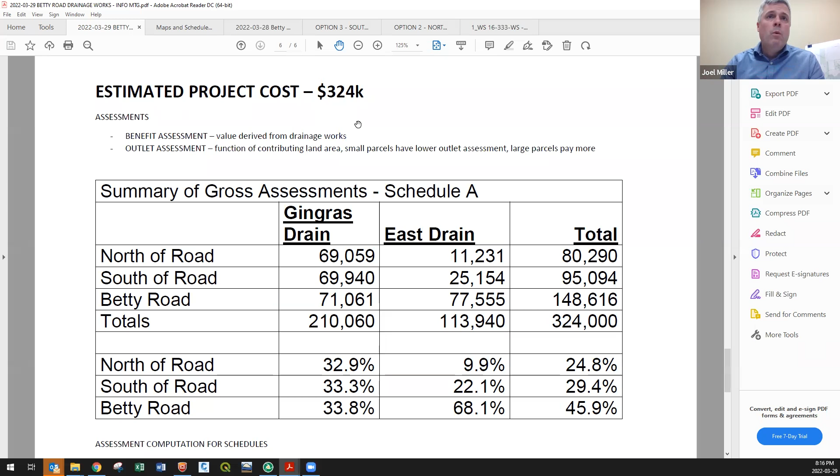The converse of it means this: if you live near the upstream end of a drain, you need the entirety of that system to function for your water to have outlet. And so when you're near the upstream end of a municipal drain, you require access to a longer system. So your outlet assessment for your area pays a portion of the cost for each interval.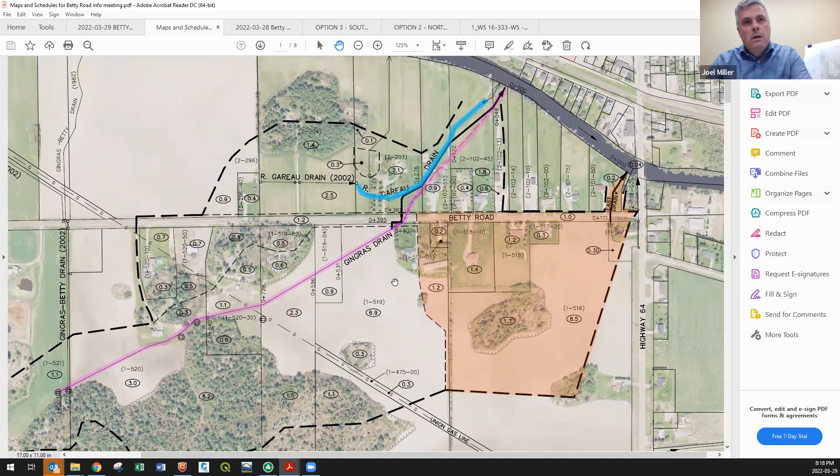So in this drain, there are 3 intervals. One interval goes from the river to this property line between Peter and Renee. The next interval then goes from that property line to the upstream side of the road, the Piettes. And then the third interval is this interval where no work is being done aside from some maintenance. So that is the high level explanation as to how assessments are calculated. Basic principle, you're assessed for benefit plus outlet, and you pay into the portion of the drain that you use.

And typically what happens is we take the estimated cost for an entire interval, then we take the portion of that interval's cost that's assessed as benefit, we subtract it off, and then there's a remainder. So if we're going to do $50,000 of work, say, and 50% of it is going to be assessed as benefit assessment to the people who benefit from the work, there's still $25,000 yet to be assessed out. So that remainder gets spread out to anybody whose water contributes to it as outlet assessment based on land area. So that is the explanation for outlet assessment.

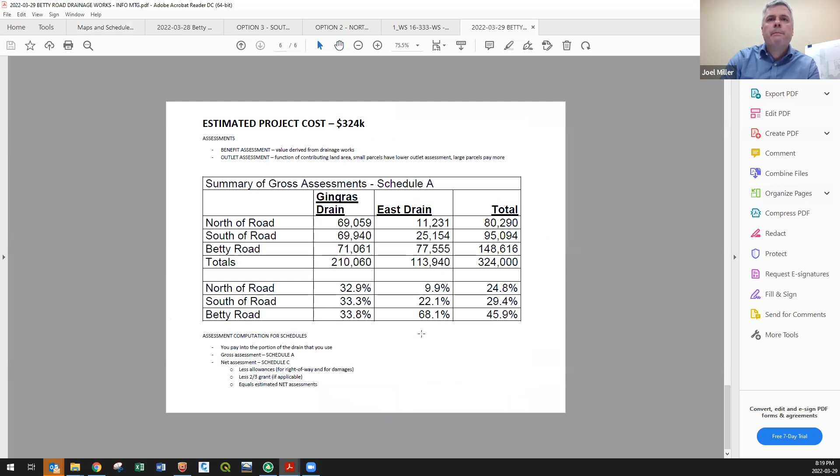Let me bring up my table of, where was it? Did I close it? I did. Just a second.

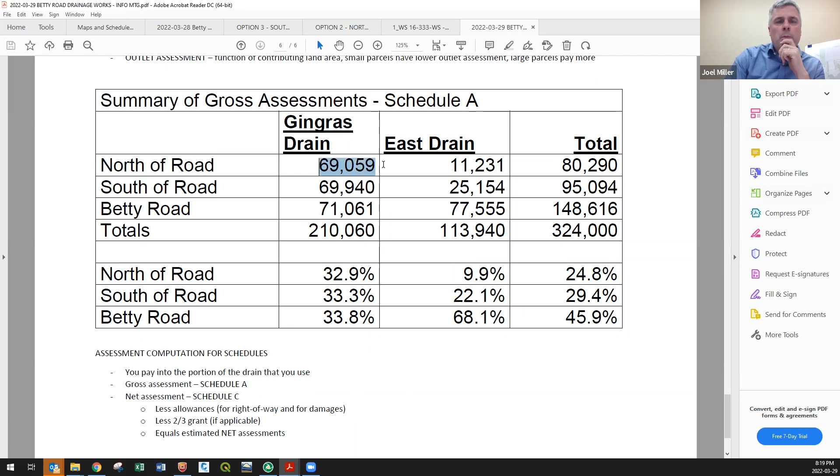So, again, I think I've shown everyone this. So when you can see a split like this on the Gingras drain, where north of the road, a significant amount of that assessment would be benefit assessment. South of the road, obviously significant amounts are outlet.

Finally, there are two schedules I'm going to bring up. The first one is called gross assessment. It's Schedule A. So it's what is your total outlet, what is your total benefit, and what are you going to owe based on our estimated cost. And then net assessment takes your gross assessment and then it subtracts off anything that reduces your assessment. So your assessment can be reduced if you're owed allowances by the project, if we use the land for the drain, or if there are crop damages.

So in this case, allowances for right-of-way are made for the pipe and swale system north of Betty Road. For the existing agricultural tile drain at the south of Betty Road, there's no allowances for right-of-way that I'm recommending. It would just add cost to that interval. It doesn't adversely affect the use of those properties now. And it would add cost to that interval, which you would turn around and have to pay, because those are the parties that would be involved in paying for that interval.

And then if properties have the farm property tax class status, then there can be grant, up to 2/3 grant eligible. So all the work on this project is grant eligible. And that's another thing that we looked into as we did our design recommendations. And then Schedule C then would show what your out-of-pocket estimated cost is.

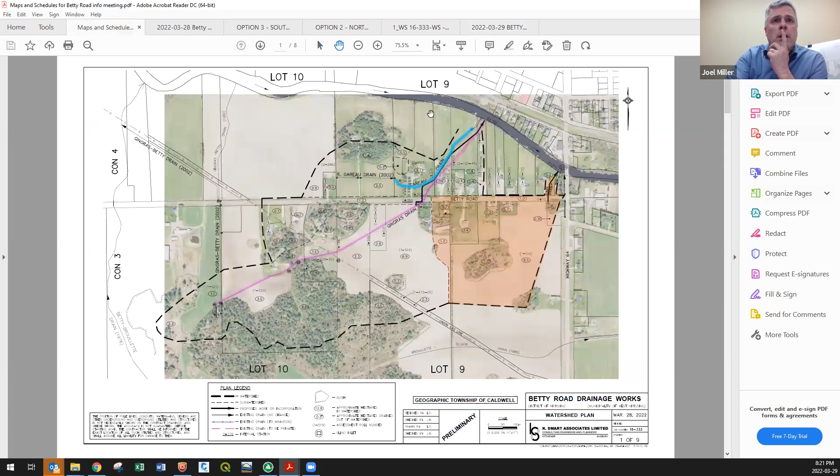Here are the estimated assessment schedules. So there's a separate one for each property. So this is Schedule A. So on the far right hand side, we have 324,000.

And that represents the summation of what each property owes with roll numbers shown here. I apologize, there's one property where I still need to get the property owner's name, but the roll number is listed there and shown on the map. It's the folks who own the piece immediately east of Sydock.

And so, as I've said here, the assessment to each property is the sum total of benefit. Section 24 and 26 benefit is something a little unique, and I'll just summarize it to say it only applies to the road in this project. So the extra cost to deal with the road for the work we're doing is assessed directly to the road under Section 26 of the Drainage Act. So that's why, for example, for the Gingras drain work, we've got just under $40,000 worth of work that needs to happen related to the road that's due to the presence of the road. So it's an increased cost, and that's paid directly by the municipality, not by the landowners.

So then once we take the total cost, we subtract off the benefit, the remainder gets prorated based on land area as outlet assessment. So that's shown here. And what I'll just point out here is that the ratios between benefit and outlet that I'm using on this job are ratios that are commonly used by drainage engineers under the Act. And so that's one of the reasons why the costs are spread the way they are, why there's a certain amount of benefit assessed, why there's a certain amount of outlet assessed.

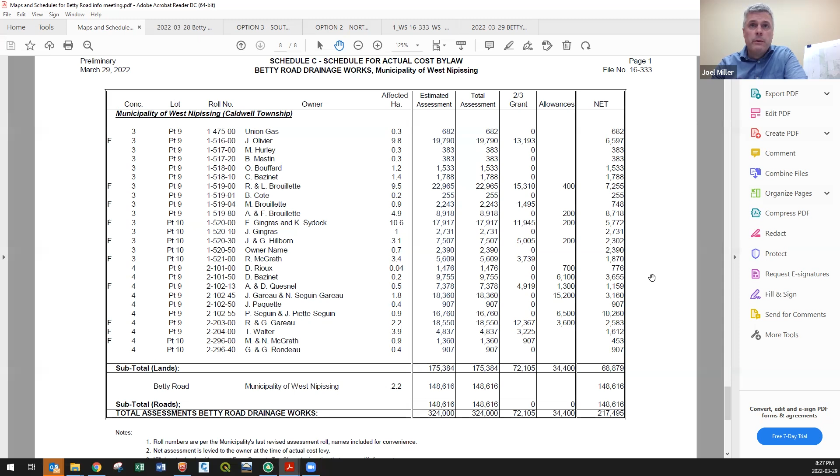So that is the crux of what I wanted to present related to assessments. There'll be more details in my report, but those are at a high level where we land. Any questions related to assessments? I have a question. Joel, can you show me the other map where it shows the numbers? Yep. The little hectares. Okay, yeah, I want to see what my number is. Is 0.2. So I have 0.2 and 0.04. Well, is that what you add those two together?

0.6? Actually, the 0.2 would be the area of your yard that slopes. So only from your driveway to the east would go into the drain. And then on the east side of it as well, that would slope towards this swale. So for you, your hectares are 0.2. That's what we measured. And then Diane is just a very minuscule sliver of the property that would slope into the drain, and it's 0.04.

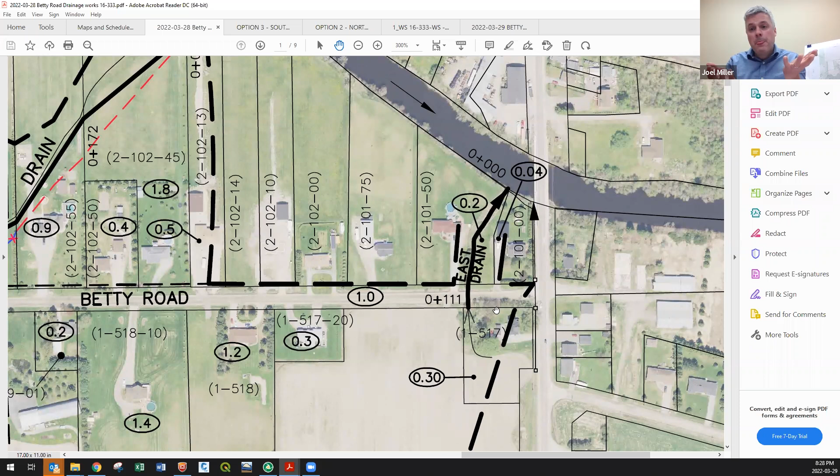So the thing is, I don't understand 0.2, how you figure out $10,000. Yeah, so the 0.2 hectares is based on the area that we measure that's in the watershed. But then remember, assessments are based on two things. They're based on benefit as well as outlet. So the 0.2 for you contributes to your outlet assessment. So if I go back to Schedule A, and we look at your row here, which is this one. There. So your outlet assessment is only 255 bucks. Where your benefit comes in, which is significant, is $9,500.

And the basis for that is through this project, there's a considerable chunk of your property that you're actually gaining, if you will, because the gully is being backfilled. And the same is happening on some of the other landowners north of Betty Road. As we consolidate that drain corridor and make it more efficient from a land use standpoint, in essence, the benefit they're deriving from this project is they're gaining land that was previously rendered sterilized, because the drain's going everywhere. In your case, you had a gully. So that's the basis for this benefit assessment. It's the use of land being gained.

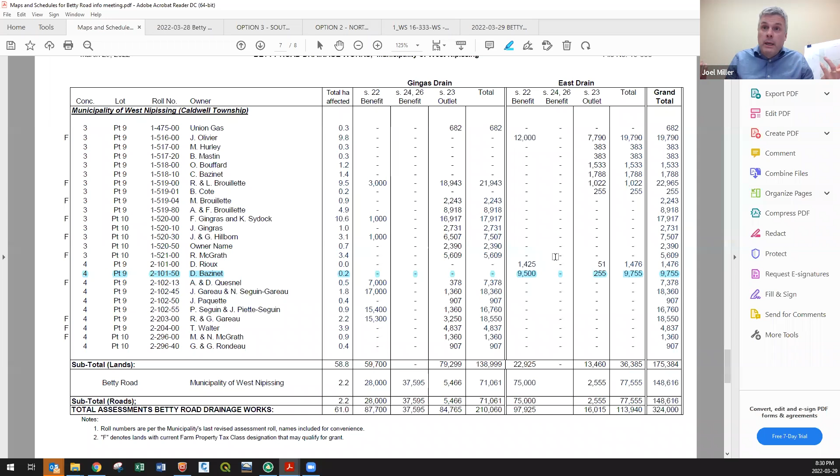So in your assessment, there's those numbers and they all add up to 9755. And then if we go to the next page, what we see is that same 9755 shows up. And then, like I was saying, the value of land being taken or designated for use for the drain on your property, I've calculated at this number. So that puts your net cost at that number. Okay.

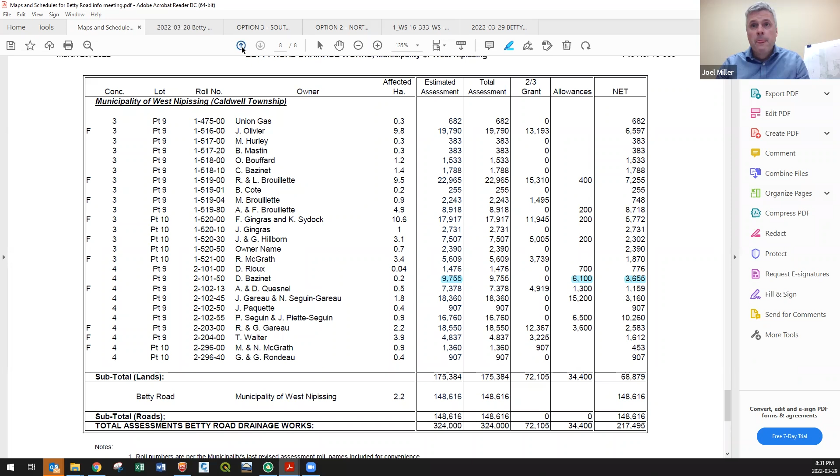And then if we look at some of the other upstream folks in the east drain, I know Brad, you were on the call earlier talking, so this would be your property. So if we looked at some of the other properties upstream of the road, there's no benefit assessment to any of those properties. They're just strictly paying for an outlet assessment based on land size. So a larger parcel would pay a larger amount. So a couple of the smaller pieces that are 0.3 hectares are paying just under 400 bucks outlet assessment.

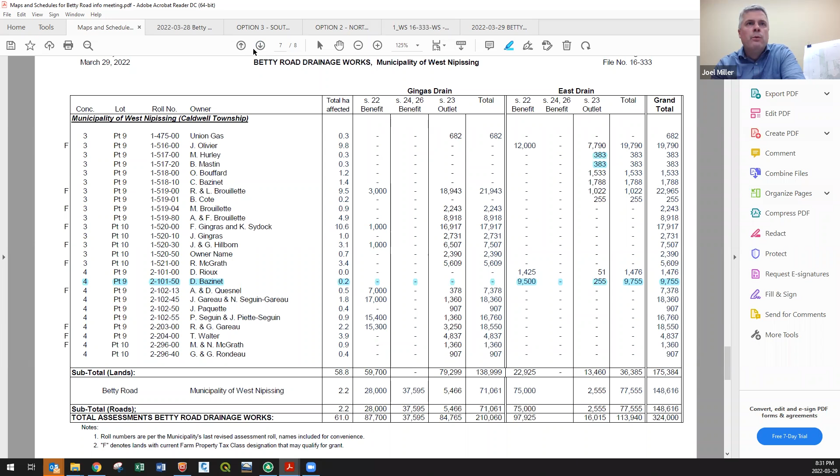Now, it's quite apparent, if you haven't noticed, probably Sean has, that the municipality is paying a considerable benefit assessment for the east drain. And when we have road superintendent petitions, each project is different and they need to be looked at on a case-by-case basis. But if we were to go here, at a high level on the east drain, about 70% of the cost is borne by the road authority.

So my rule of thumb when I'm doing road superintendent petitions in cases like this would be for that number to be 70 to 90%. So that's where I land. But in this case, there's certainly benefit also derived by your property due to the stability improvements. But there's no question that the upstream watershed needs to contribute through outlet assessment.

So that is, and as I said to someone earlier this week, in calculating assessments, I realized that's the reason you guys are all here, to find out what your number is going to be. I can understand that folks do not necessarily agree with how I've assessed the project. My duty is to be fair and, in my best judgment, to make a decision consistent with the requirements under the Act. So let me just walk through where we go from here.

We have some field work to do tomorrow. I'll be available if you want to reach out to me. My information's on the screen. In the very near term, I will be trying to finalize my report and file it with the municipality, because, we were kind of sidelined with COVID there for a while, but the intent would be to move the project along, potentially to move to construction this year yet.

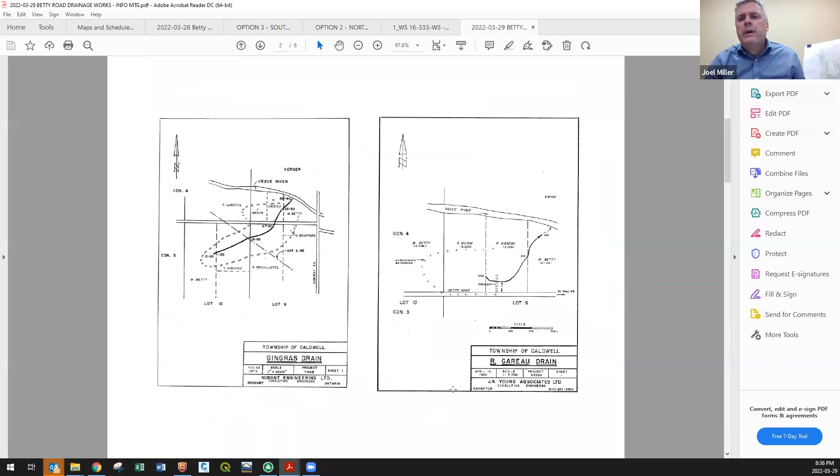Yes, Joel, it's Brad. I was just looking at the 2016 assessment, and there was never a drain other than the Gingras drain ever tabled or registered for this tract of land, ever. Yes, that's true. When you say 2016, your tax bill? Well, it said 2016 on the screen. Oh, this is the year of the aerial photography. That's what those years are. So 1989 was the year they took that air photo, and 2016 was the year of this air photo. So that was just kind of a comparison.

But back to your question, and it's a very good one. Historically, your parcel, if I actually have the map I need to illustrate this, was not part of a municipal drain watershed. Okay, so this would be you right here. You see that? Yes. So until my report came along, this was the most current watershed map for Betty Road. Based on the existing drainage works at the time this report was prepared in 2013, there was no municipal drain downstream of your land. You were not in a municipal drain watershed.

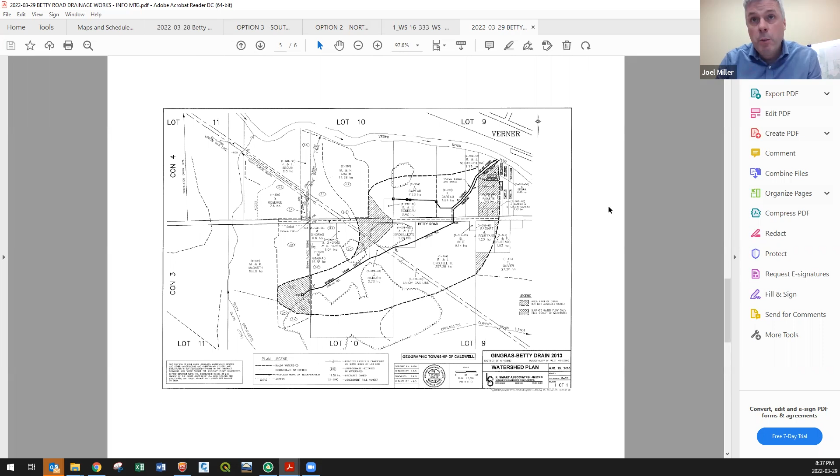As of the new petition for a new drainage works to be called the East Drain, your parcel is now proposed to be within a municipal drain watershed. So historically, you're correct. You're not part of any municipal drain watershed, but downstream of your land, there's been a petition. And so now your property finds itself in the watershed of a proposed municipal drain. And this is how it goes.

I had a conversation with another person just a few weeks ago too, who was talking about the historic drainage map. The municipality didn't have this land in a watershed, but there was a new petition. And because there's a new petition and there's new drainage works required, there is a new catchment that gets drawn for that drainage works. And so that brings new parcels into the drain.

So, yep, you're right. And that would be my response. Joel, I have to say I'm frustrated a little bit because I did not ask for you to, I know you have to fill out the ditch, but this is private property. If it would have been fixed many years ago, I don't think I would have had to pay that. There's erosion that you have to fix.

So my question is, yes, I will end up with more yardage, whatever. I did not ask for that. I was happy with my ditch. I don't mind the ditch. I don't need to have more lawn to mow. I'm happy with that. And you've assessed me something that I don't really want. So I'm stuck paying that.

The thing is, it's because I have 0.2 of water that goes in that ditch. You're giving me the cost of new lawn. I'm having more property, which I don't want. I have enough right now. I don't need to have an extra ditch. The only reason I'm doing this, it's because it fixes everybody's problem.